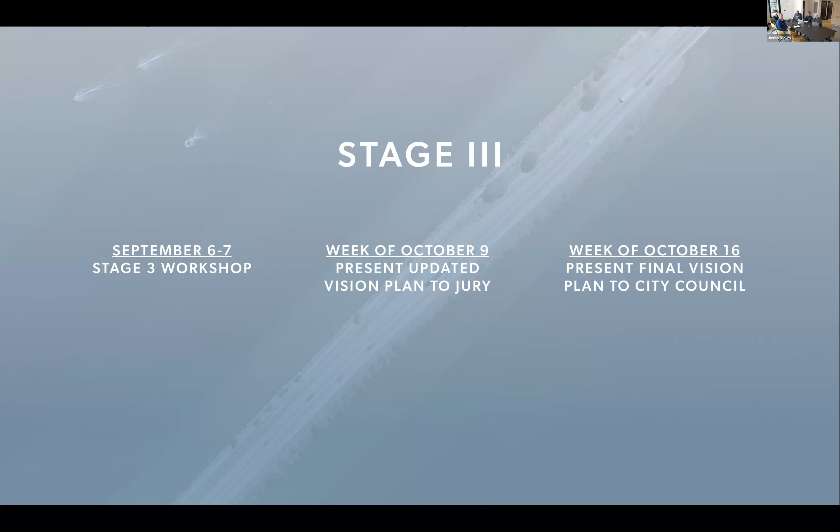Then next week, and the dates are plus or minus a day, but next week we will be in front of council. So what have we been doing over the past month? It's been very enjoyable, productive, and lots of work. Upon being selected, we actually had an internal design review with our entire firm to share ideas and see if there was anything, reactions, what we're missing, things to think about. This is something we do in kind of a studio setting as designers.

One of our first meetings, which was very positive, was with the ZPD development team, the developer and their architects. We walked through overall intent. I think we collectively worked on some broader guidelines moving forward and goals to make sure everything's in keeping with the master plan. They were eager and willing participants. I think there were some positives that came out of that.

And then we had on September 6th, an in-person workshop with city staff. I think Jennifer and Don and team, that was probably 5 hours straight of very productive conversation, going through almost every aspect of what we're going to show you today. A lot of that fed into what we're going to review.

Then we had a working session with Jerry Dicker and his development team and architect in his hotel in Spokane. Another positive meeting that gave us some insight on what he's thinking. And then we had a tribal engagement plan meeting, again another very positive and productive meeting. Sarah will share the results of that shortly here in the plan moving forward, which we're pretty excited about.

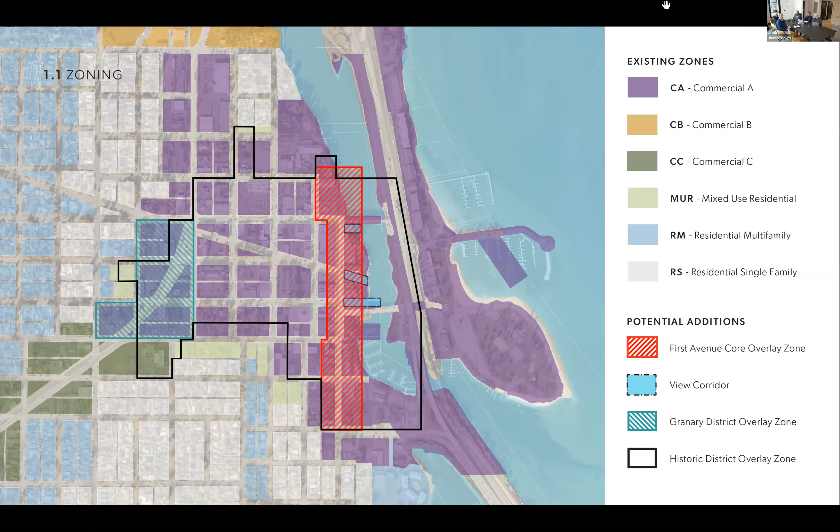Overall, we think that the zoning is pretty solid, but there are some nuanced recommendations we want to make. So before we get into those, Josiah, do you want to add anything? No, you got it all. I'll introduce this next piece, and Josiah will jump in once we get into some of the recommendations.

We did look at the existing zoning, and for the most part, paraphrasing, there's a 35-foot height limit in the zones, and then each allows varying degrees—45 up to 65 feet of additional height—when certain uses are added: residential, structured parking, and others. So in theory, we think this...

Good, go to the next. What we did do—I'm sorry, Mark. Sorry to interrupt. I was unclear what you said there at the end. In theory, what? In theory, we think that works as an idea. We appreciate and think that's the right way to go—having bonus density for specific things like structured parking and housing. I think how much and how high, depending on location, is something we wanted to unpack a little bit.

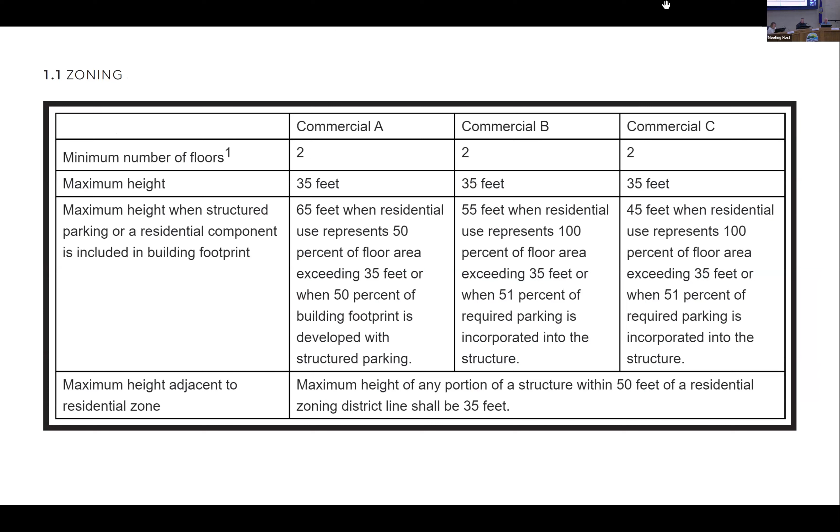So let's go to the next one. The idea is, let's just focus a little bit right now on First Avenue. We have historic buildings on one side, and we have the series of new buildings coming in on First that are, metaphorically, a bridge to history and a transition to Sand Creek. What we're honing in on with this study is trying to enable successful economic development of new buildings without really being an intrusion or a disruption on the context and core of your charming downtown, particularly with the historic buildings across the street. So what you're seeing here is a three-dimensional study and modeling of 65 feet in a full block, and 45 feet in that full block.

Again, this is First Avenue along Sand Creek across some historic buildings. What variable setbacks and view sheds would be so that we could assess that.

So on the top, you see an aerial. In the middle, you see Church Street looking east, and then you see a view of Oak Street, and then you see First Avenue looking south.

In assessing that, we're trying to straddle the line of not limiting development. We want development to happen, but not creating something that will be ill perceived by the community or that we may regret.

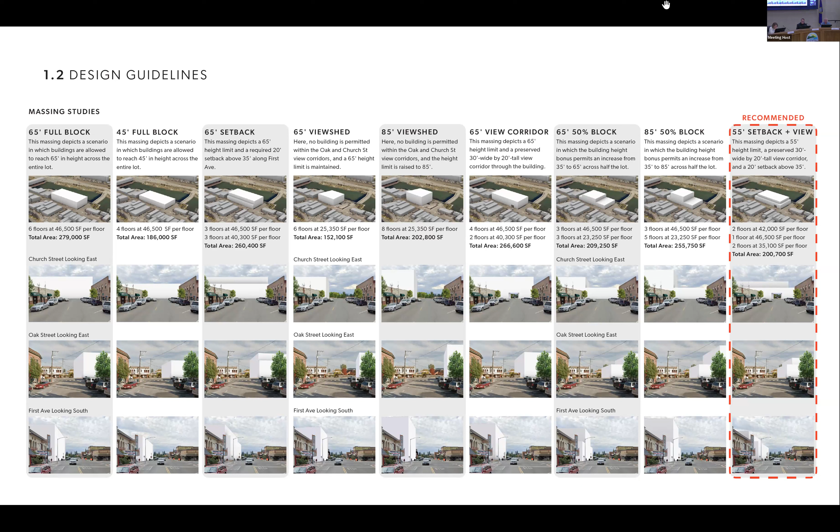It became pretty clear to us on the right that a 55-foot height with setbacks of 20 feet provides a significant envelope for development, but isn't out of step or context with existing buildings.

Economically, from the development standpoint, of course 65 feet is great, but as you saw in some of those studies, which we can go back to during Q&A, it really is hard to see it working. Now this, we feel like, works pretty well.

And so a couple things: you see 35 feet of development with a step back at 35 feet, 20 feet, and then a height of up to 55 feet, with the addition of some sort of portal or view corridor in the alignment of the street.

There's street activating uses, retail, food and beverage can wrap those. There could be a public accessible walkway through that and an overlook out the other side with activating uses and spill out undercover, but the goal is to be contextually sensitive while setting up ease of future development.

And creating view sheds. So this is the sort of end point that we got to with this process, but we think the next process is distilling down guidelines.

Some of this came out of our conversations with the developers. And the other side of this is Sand Creek, of course, allowing, as we presented last time, development to extend out. So the high level guidelines we talked about before were about following a little bit of the rhythm, scale, bulk and mass of the existing buildings with new materials that represent today.

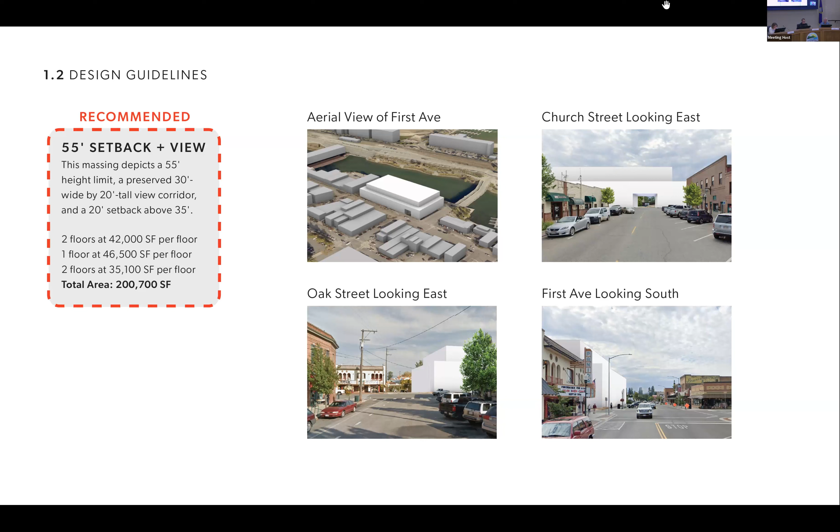And then the guidelines that'll be in the final report, that's a high level one-pager, include using masonry and solid materials at the base, keeping design and the level of fenestration and modulation relatively simple to focus on the quality of the materials. So things along those lines.

I think we want to avoid what we would call gingerbreading of new buildings. We'd rather have quality new buildings that are a future landmark or historic building because they're significant in how they concisely solve the problems of today.

So through the guidelines, what we're not doing is promoting a postmodernist recreation of a historic building. We think that diminishes history over time. We're also not trying to promote an over-gingerbreading of a new building to make it look less bad. What we're promoting are simple, authentic buildings with quality materials that are representative of the uses and challenges of today. There's a lot more to talk about with that and a lot more to develop, but that's the basic premise.

Mark, can you give me or give us an example of gingerbreading? I don't have a concept in mind of the difference there.

Yeah, thank you, Mayor, that's a good question. So I'll describe it without going into any specific project, but you've probably all seen in your travels, or even in Sandpoint, buildings that have 20 different materials on one facade, with a lot of 2 to 4 foot jigs and jogs, busy with a lot going on, not necessarily tracking back to an architectural expression of the use or purpose of the building, but more so as a way to break up a building to make it look less bad.

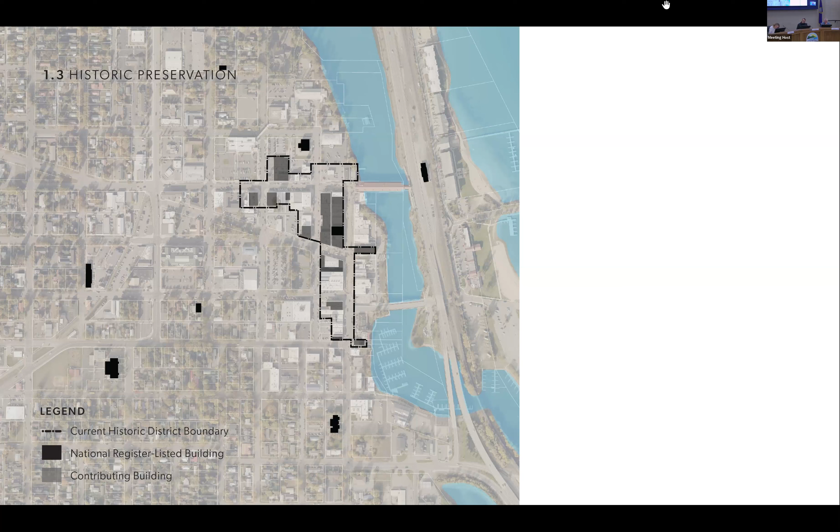So with that, Josiah's going to jump a little bit more in detail. Yeah, so we met with the city and discussed where we're currently at and what we'd like to see to get these buildings under actual protections. So this is what we helped them come up with.

Then the idea there is if you are within the district and you have a historic building, there are more specific guidelines to be developed, and the Arts, Culture, and History Committee reviews it based on those guidelines. That's a follow-up thing that we need to do.

And then if it is a new building within the district, it needs to meet certain criteria of being sensitive to but not replicating historic buildings. So there's probably a layer of design review and an overlap with the Arts, Culture, and History Committee that needs to be an outgrowth of that.

I think the other layer is that we're going to recommend streetscape standards within the district established for your downtown that bring that together in the public realm, which can be implemented both with public projects and with new development frontage improvements. So we'll probably leave it at that and get into the detail in Q&A.

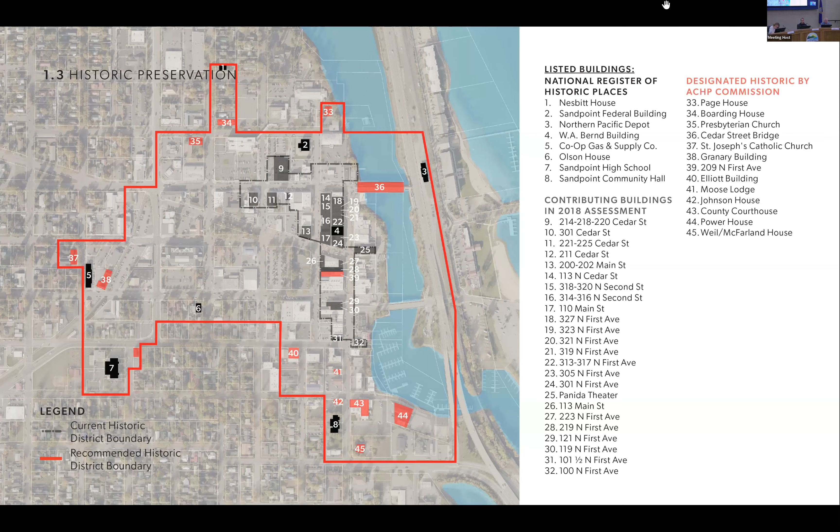Great, so now we're going to move to point 2, and the first one was a big one, so we'll move through these others a little quicker. But balancing ecology and human activity, I think there was a desire to see some more of the ecological improvements providing also some human benefit. So we've focused here on the Sand Creek and City Beach areas.

This is where we left you, and then this is some of the adjustments that we've made. We've incorporated 3 kayak launches along Sand Creek: one at the top at the Cedar Street Terrace, one at Farmin Landing, and then also adding one down by the carousel, as this is an area with accessible parking.

Then we've also been working to develop some ideas for sculptural berms that could help reduce sand migration and prevent wind from getting into City Beach. We're adding lawn and picnic areas incorporated into the meadow and the forest down towards the point, and making sure that we preserve trees along the beachfront to provide shade and windbreak.

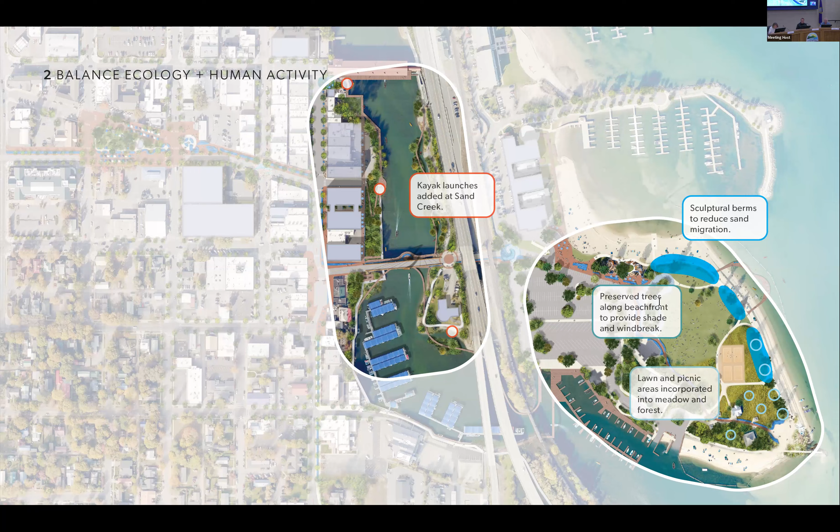The concept of berms came up in the discussion when we met with the city in one of our workshop presentations, and the idea of whether there were ways to mitigate sand migration during the winter months and high winds. So we talked about sculpting some berms near the shoreline, using native plantings on the windward side, and considering whether these berms facing the pavilion or the large green at City Beach could have a sculptural feel, maybe even possibly some seating.

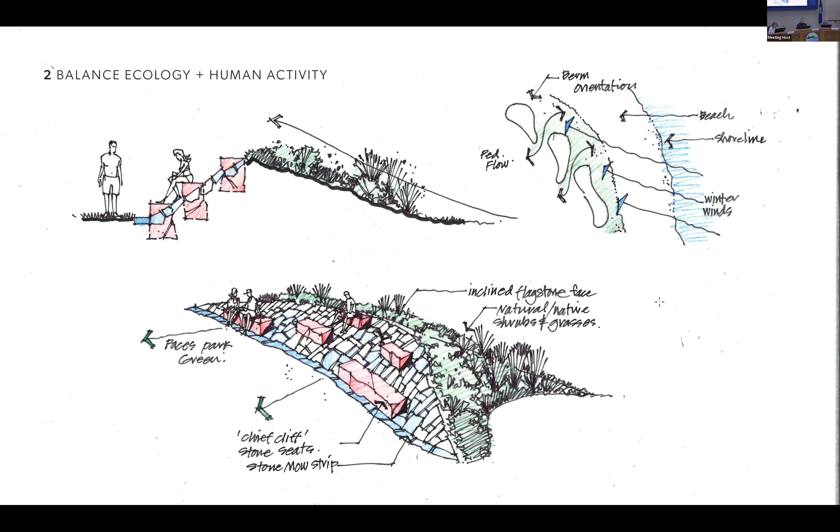And then the arrangement, shown upper right, of how they're oriented and how they can help deflect some of the winds and help promote maintaining the sand versus the migration.

So next, you asked us to look at diversity of housing and considering workforce housing. So we want to get into that briefly.

So a couple things. What we have here is a half-mile, or 10-minute walk radius in your downtown. What we've found and what we're recommending is that a percentage of workforce housing within walking distance of downtown, particularly considering the composition of downtown Sandpoint, is critical to support the service industry from an equity and sustainability standpoint. We rely on a strong workforce for our daily functioning and during tourism season, and taking our workforce and pushing them to spend health, safety, and resources to drive in snow and sleet and dodge animals miles away for housing is just not sustainable and not equitable.

So the first take at this was, what opportunities are there to provide a baseline? The goal would be 200 units within this area. So we looked at a couple sites to get there.

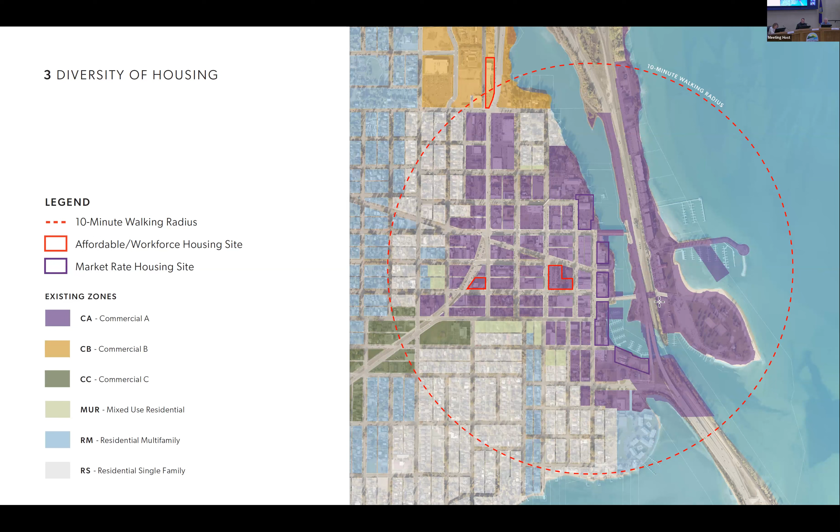You're all aware of many of these things, but we do think, although we have to be careful not to layer too much onto the city parking lot, that there's an opportunity, if it can work economically along with the parking, that should be looked at. There's the site in the Granary District that you're well aware of, which has opportunities underway. And then there's the site just at the northern edge of the boundary, number 3, which is a significantly sized site with strong opportunities. So we're thinking with those 3 sites specifically, there's an opportunity to try to achieve that 200-ish number.

That's based on a fair amount of experience working in similar cities. If we want to get analytical with this, we would recommend a study on workforce housing citywide and for your downtown to vet that number, but I think it was a pretty logical first take.

Some of the other sites, we did talk to developers as you saw through the process, and it's a bit of a push. What we found is market rate housing is private sector led, and of course we want to promote and get that. Deed-restricted and affordable housing is often nonprofit and agency-led. Workforce is really where the partnerships between city, urban renewal specifically, and private development have a lot of opportunity. So that's led to looking at these 3 sites.

And I'm sorry, let me ask for clarification there. You're estimating that the appropriate number within that zone is about 200 workforce housing units? Correct, Mayor. And tell me again what that's based on? That's based on experience working in similar sized cities, kind of going bottom up and top down from what's available site-wise, and what feels good.

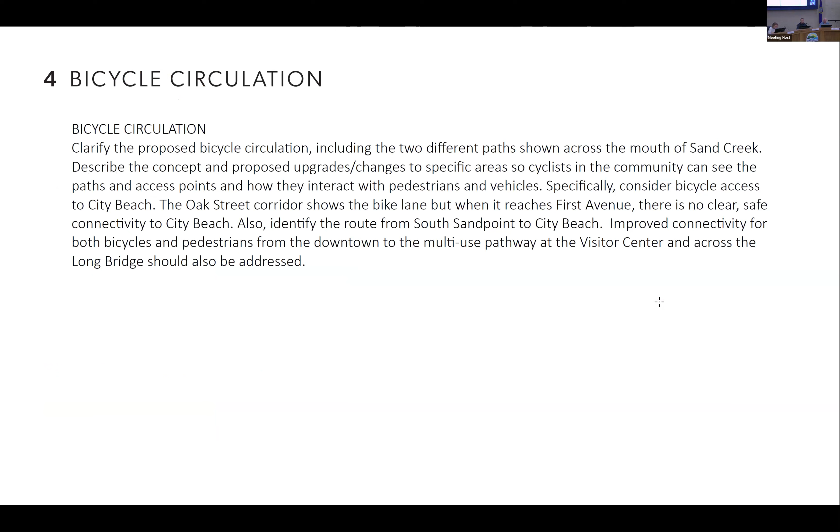So then a next point of clarification is the bicycle circulation, especially identifying how bikes connect into downtown from the Long Bridge, and then what happens along the Oak Street corridor.

So this is what we had when we last presented to you, and we've added some clarification here. Those dark blue lines show shared paths where both pedestrians and bicyclists are sharing the same pathway. The green dashed lines are dedicated for cyclists, and those yellow dotted lines are the boardwalks and trails just for pedestrians.

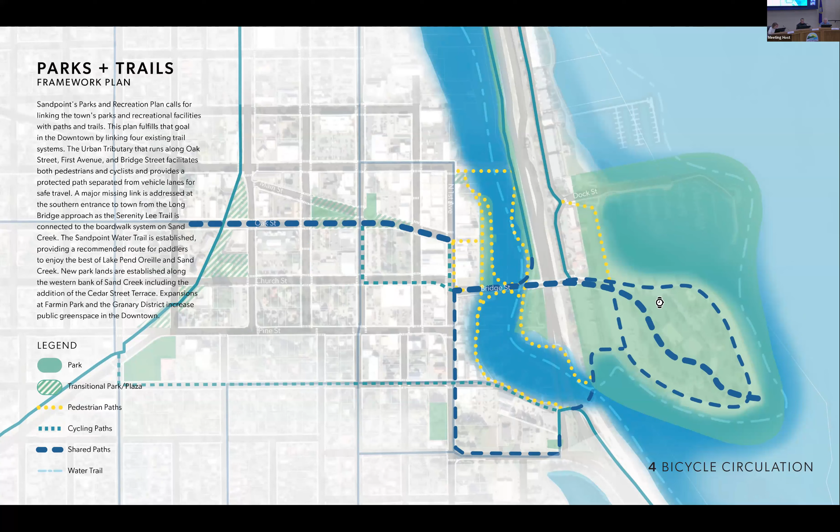So if we look at how that applies to bicycles, here we're just trying to create connectivity across from the trails on the west side to the waterfront trails. Making it really clear for a biker, if they're coming in down off the Long Bridge, how they could stay on a protected lane, this solid line all the way through to Bridge Street.

At this point, because First Ave is traffic calmed, we're proposing that this become a sharrowed lane where bicyclists ride in the lane with vehicular traffic. The other additions you're seeing here are buffered bicycle lanes, which would be their own designated area within the paved right of way.

That provides an alternative from down 3rd Ave and Church Street, and also a neighborhood connection down Lake Street, connecting to the Sandpoint Dover Community Trail.

That's great, a quick question on that. I want to verify you confirmed with staff that there's enough width on 2nd Avenue to accommodate that buffered bicycle lane connecting Oak to Bridge Street or Church Street there on 2nd. Is there the width necessary there? I think we're actually showing that on 3rd Avenue. Oh, thank you. But yes, I think it would work there too, with the new public parking lot redevelopment.

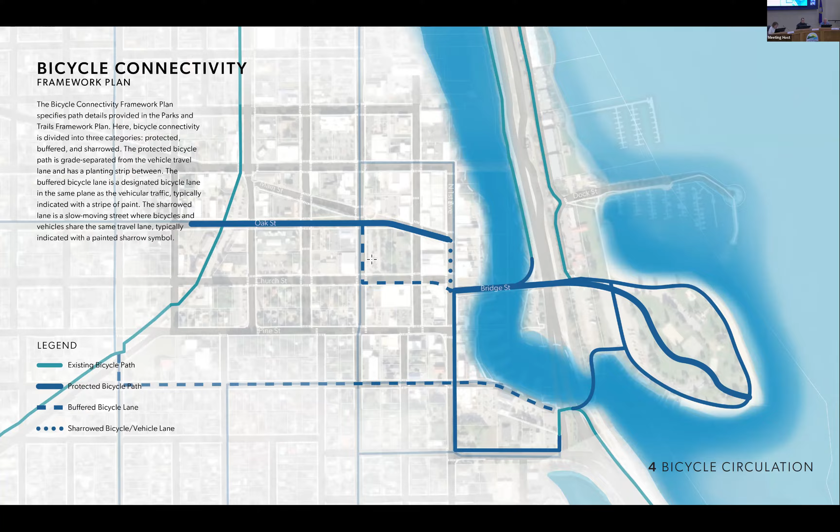Next, we also wanted to provide more information on the urban tributary cross sections, to give you a better idea of what that looks like, and also address some specific questions about the plantings. Mark and Sam can tell you more about that.

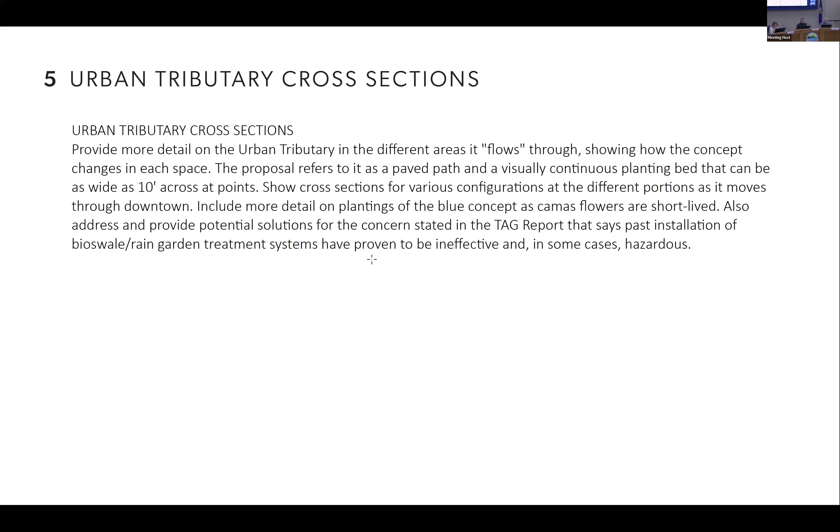Sam's going to go through piece by piece, but the overall idea is to have a cultural and environmental placemaking, education, and interpretation feature that brings the rewilding idea right through the core of your downtown, supporting the many events you have, and teaching folks about the basic ethos and history of Sandpoint. Sam's going to walk you through the system, then we'll get into specifics for each one, and talk about the planting at the end.

We'll start at City Beach. This is the most wild interpretation of the urban tributary. As you move into downtown, at number 2 it becomes a raised planter, providing protection for pedestrians from vehicles, with raised planters for harvesting. As you turn the corner onto First Ave, this is an in-the-ground planting bed area, again for pedestrian separation from vehicles and to keep the path flowing.

At 4, 5, and 6, when you get to the Oak Street event corridor, this is an area with slowed traffic, larger raised planting beds, more areas for harvesting, and more gathering spaces for the events that Mark touched on. Now we'll see those in section.

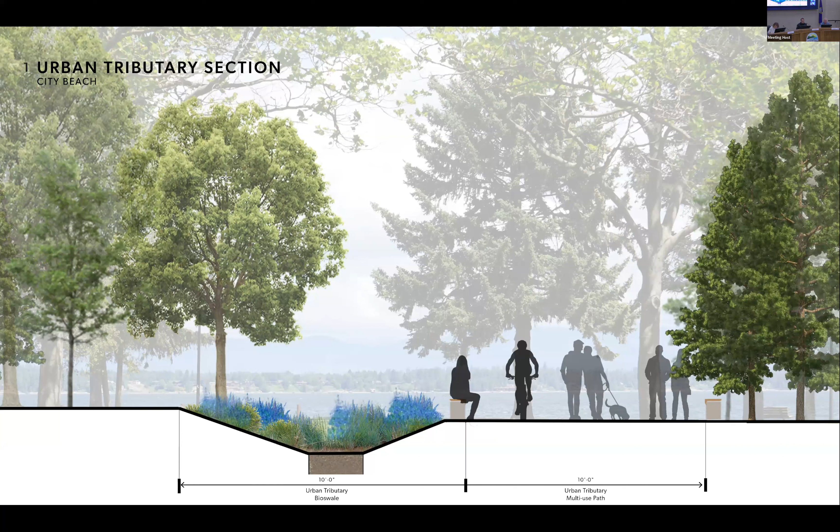What you'll see here is a mix of paving, lighting, planting, and seating with art and cultural and indigenous interpretation wrapped into this piece. It undulates and varies as it moves through the system Sam is describing. At City Beach, you get a bioswale condition where you can manage the quality and quantity of stormwater. It's a more wild approach, shared with an urban tributary multi-use path for bikers and pedestrians as you move through City Beach.

At Bridge Street, you're coming off the bridge into downtown looking at First Ave. Here you have a property line adjustment with the current landowner, and you'll see you've gained 12 feet, giving opportunity for a much larger sidewalk experience with new development.

We're trying to have an active storefront at the ground level, integrating outdoor seating, and here you see the raised, protected urban tributary planter, where during festivals or events, harvesting of the flowers can actually happen. This is camas 30% in intense areas mixed with other elements we'll get into shortly, and there are areas where that may be harvested in a demonstration and interactive sequence. Where that happens, it's raised for a more cultivated bed, for ease and protection.

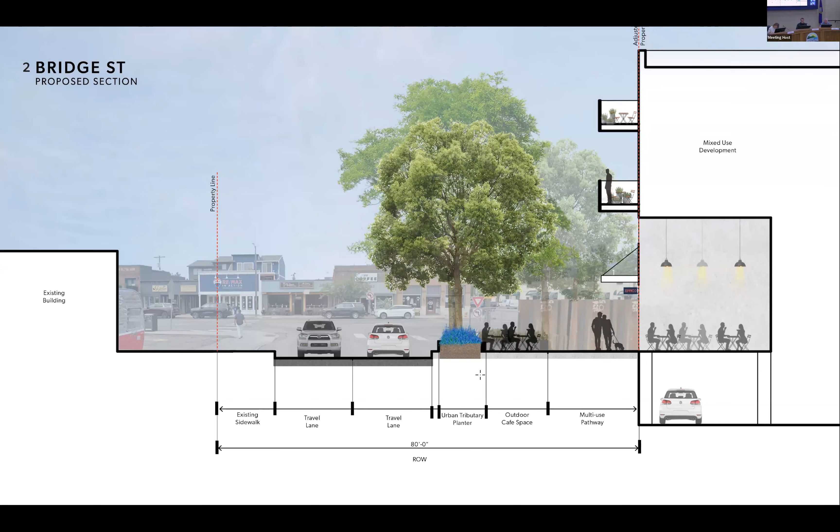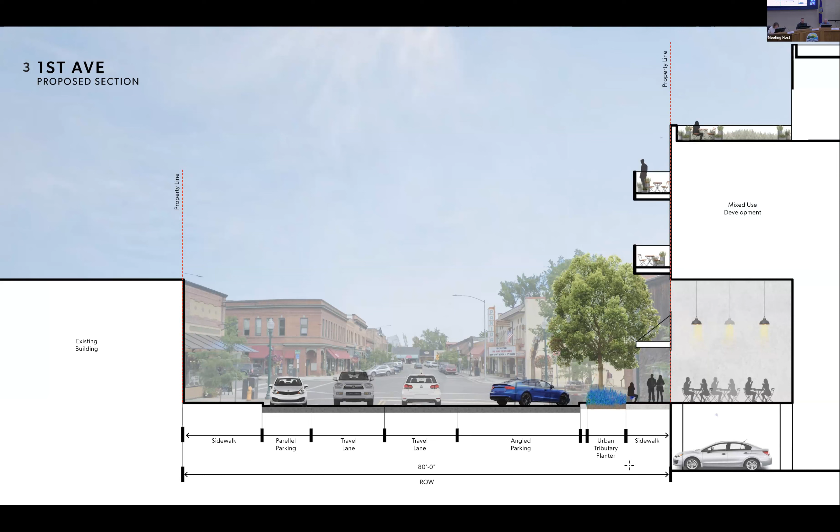As you move to First Ave, this is the current condition, keeping the existing sidewalk curb lines but incorporating the urban tributary planting form with new development, still integrating art, seating, and lighting along the way. Then as you get to the Oak Street event corridor, now a calmer street and a place of events, it flows down the street, using the sidewalks more as plazas.

You see the bike lane here, and then one side of where the angled parking is. This parking count will be accommodated in the new parking garage site that you'll see in a second and have seen on the maps. But here again is the raised planting and the wide multi-use path.

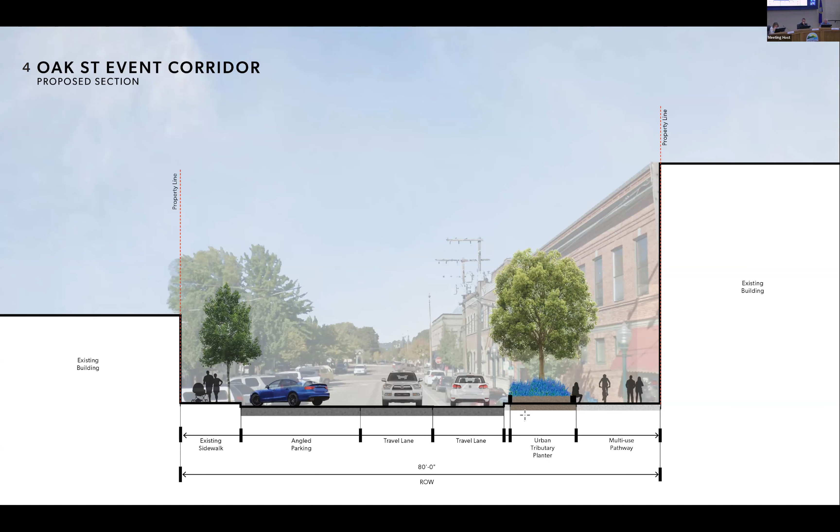And then sharrows here, so if the bikers don't want to be on the multi-use path, traffic will be calm enough that they can use the travel lanes as sharrows.

As you move further up the Oak Street event corridor to the plaza, you see where the new mixed-use development comes in, changing both sides of the curb. You have a lot of excess room at this place where we're proposing a larger plaza space, with raised planters, outdoor seating, event space, the multi-use pathway coming through, planted curb bulbs, and art and lighting all layered in.

And then what you've seen before doesn't end, but goes to this point of Farmin Park. We think Farmin Park, shown here as an in-the-ground planting bed, would be sort of a mix here as a really exciting destination along the urban tributary.

Okay, so let's get briefly into the streetscape hierarchy.

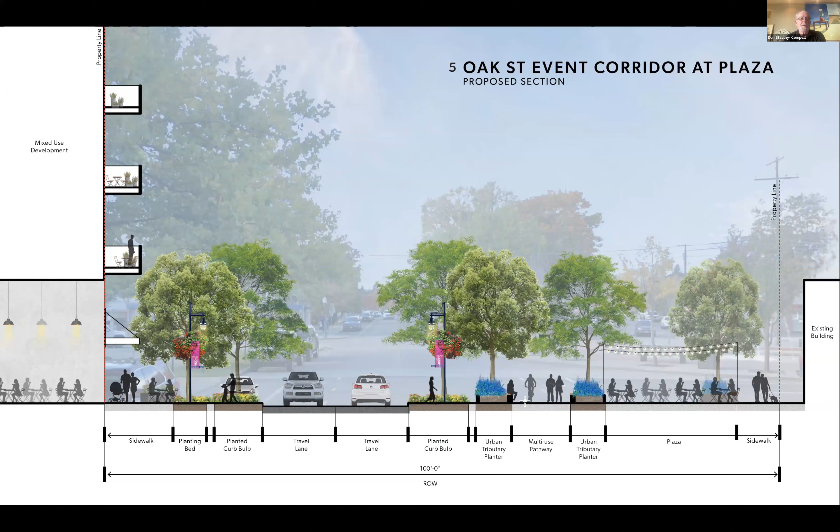If I might point out to the jury, it's very interesting to me, looking at the work done on the urban tributary, that there are clues within these that begin to inform potential development along the edge. It's beginning to set a framework for what those private developments might be, which as design guidelines are more fully developed could be a part of that. It serves many purposes, not just as a tributary, but also to inform the surrounding area.

Yeah, very good point, Don. Thank you, and part of the intent for sure.

All right, streetscape hierarchy - we've referenced this before. One of our recommendations moving forward is to develop streetscape standards for lighting, paving, and planting, a general upgrade for the core downtown area, which could use the landmarks or historic district as the boundary.

Within that, specifically to address your question about lighting: given the condensed nature between City Beach and the Granary District, and the lake, we're thinking all of this needs to be subtle, accented, and as dark sky compliant as possible, which is another reference you rightfully made earlier. For City Beach, the idea is low level accent lighting for wayfinding, but very intentionally kept subtle to protect nature and the night sky.

The urban tributary has its own lighting approach that cuts through that. Then we have seasonal features - the ribbon and the carousel - that would be beacon lights, with their own lighting associated, serving as draws in the winter. But again, for City Beach, it's a very low-level dark sky compliant approach.

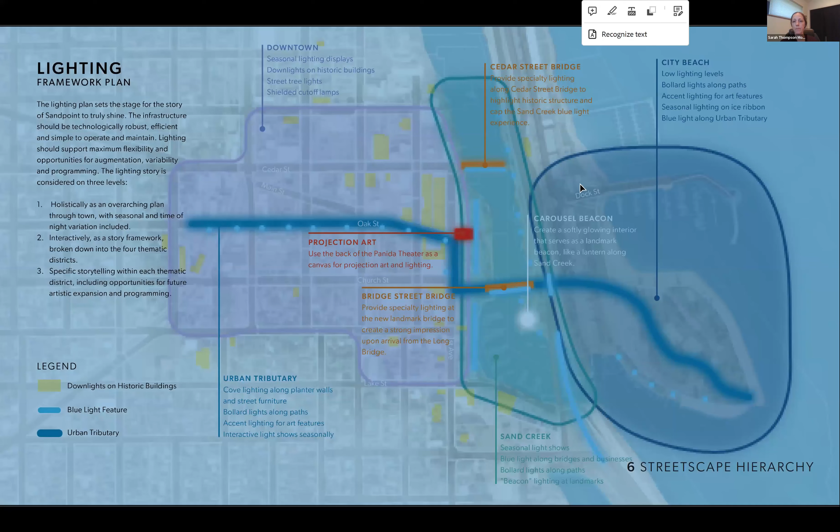We can get back into this in more detail in Q&A, but you get the idea. Let's move on then to seasonal activation.

Here we were looking to provide some more ideas of seasonal activation of the area, especially in the off season in the winter. We had some fun working with the city to develop ideas for other activities and events that could happen in the non-summer months.

You're back, we lost you there for about 30 seconds. Oh, sorry about that, okay.

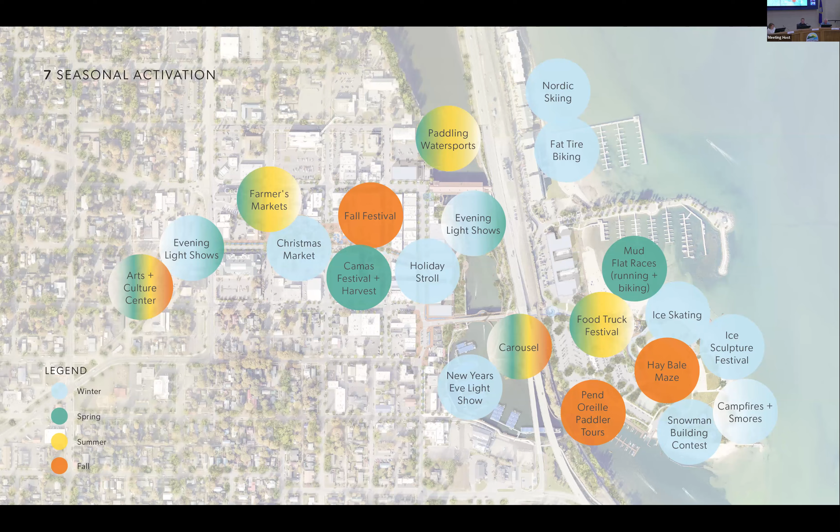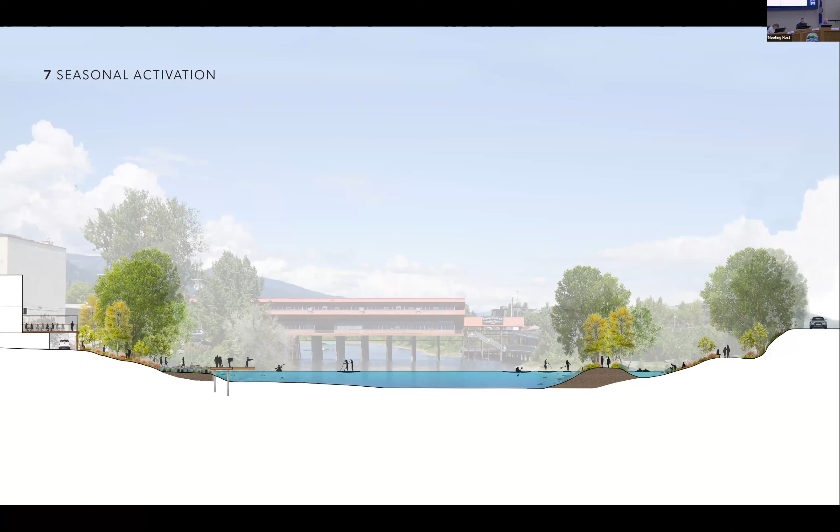We also spent some time looking specifically at Sand Creek. I think you guys have seen this - we know it's a very active place in the summer, so we've also thought about what it could become in the winter.

This is where the lighting concepts can really come into play, with seasonal light shows that happen at certain times in the winter that could really be a draw for Sandpoint. This image starts to talk about some of those opportunities.

We spoke about art projections on the back of the Panida Theater. We'd be looking at methods that create subtlety of light that really interacts with the environment at Sand Creek in the winter, such as the mud flats being a dark canvas that light can project shadow patterns onto, or the light can pick up the textures of the mud flats and bounce off reflections in the existing water.

Potentially working with lighting elements casting downward from within the trees to create shadow patterns on the ground, lighting under the bridges and highlighting those bridges like we spoke about earlier, but really just creating a really interesting environment to explore during the winter through light and nature.

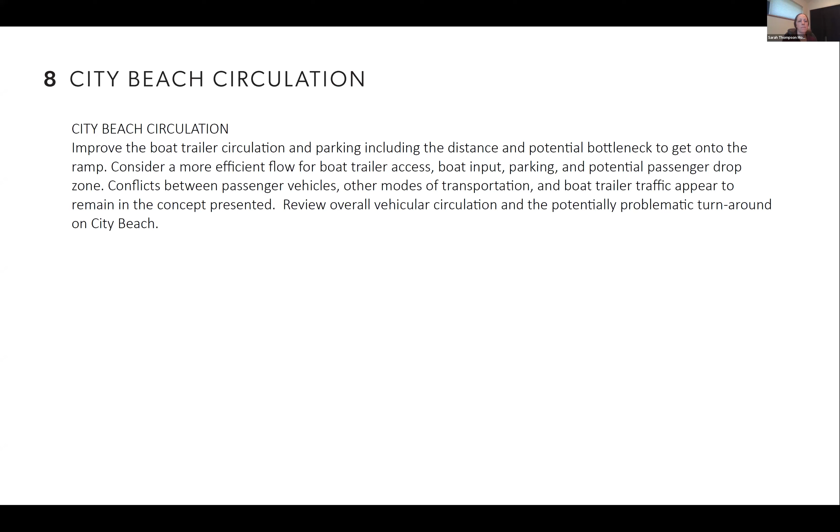Another point that we wanted to clarify is the city beach circulation. We've been working very hard to try and meet some of those concerns.

As we oriented the parking in a north-south orientation for both the beachgoers and the boaters parallel to each other, there was concern about somebody driving in, getting mixed up with our launch activities with no way to get out, and the safety of people crossing through the parking lot oriented that way. Those were some of the big concerns. We were also asked to look at the number of parking stalls, the number of boat slips, and things like that.

So we took a look and went back and revisited it a little bit. What you see now is beach car parking on the north side, the boat trailer parking on the south side, both now oriented east and west. The orientation as people move into the beach area from below the byway and the railroad, with an immediate orientation and traffic calming happening here, with the immediate right being access down to the launch area.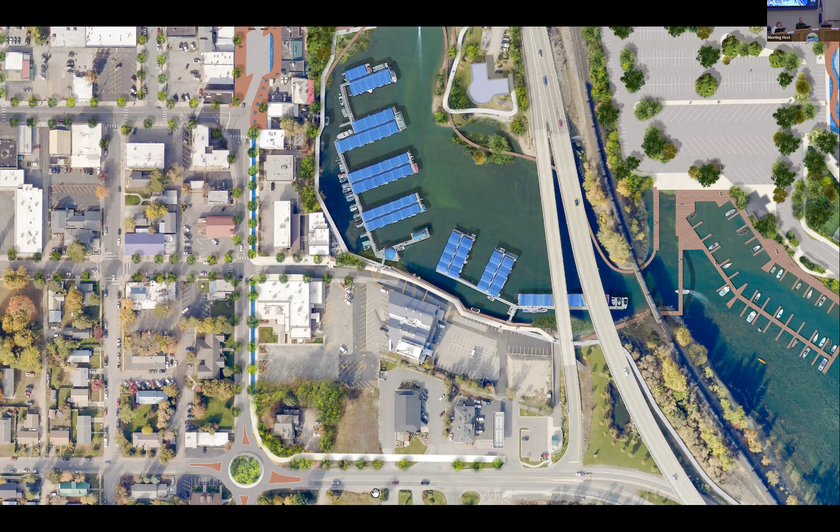Okay, great. And just do the same in reverse if you're going the other direction. So if you're going southbound on 95, you come here, there's a signal. Once you get the green, you turn south here, go around the roundabout like that, and then head out of town. Great, okay, thank you.

So we talked about the bridge. When we visited with you last, we talked about the importance of Sandpoint being recognized as a community with some very unique bridges. This is the plan we presented to you that had some separation between the vehicles and the pedestrians. You heard Mark mention that Phil and him have discussed with KPFF the logistics of the bridge construction, the materiality, et cetera, and I'll let Phil walk you through some of those thoughts.

So the discussion we had with KPFF's bridge engineer focused on the feasibility, timing, and money, which are always important features. We ended up looking at three different scenarios. The first would be a staged construction, which has a longer time frame and costs more. The idea is to use the pedestrian bridge, which would be new, but design it so it can handle traffic initially, probably a single lane going either in or out to the City Beach side. Then the bridge would be done in stage construction: you build half the bridge while the existing bridge is still there, then demo that half of the existing bridge and build the second half. So that's one option - it takes longer and costs more money.

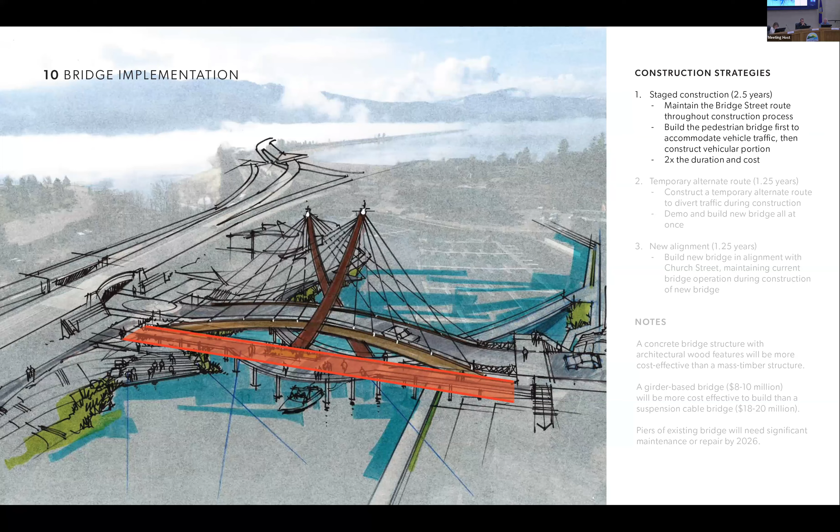So then we looked at the scenario of getting temporary exits off of 95 that would come down the railroad access road, the depot access road, and perhaps develop a one-way configuration in and a one-way configuration out, which does cut the traffic time down. The challenge with it is you're working with ITD to get temporary access off of 95, which can be challenging.

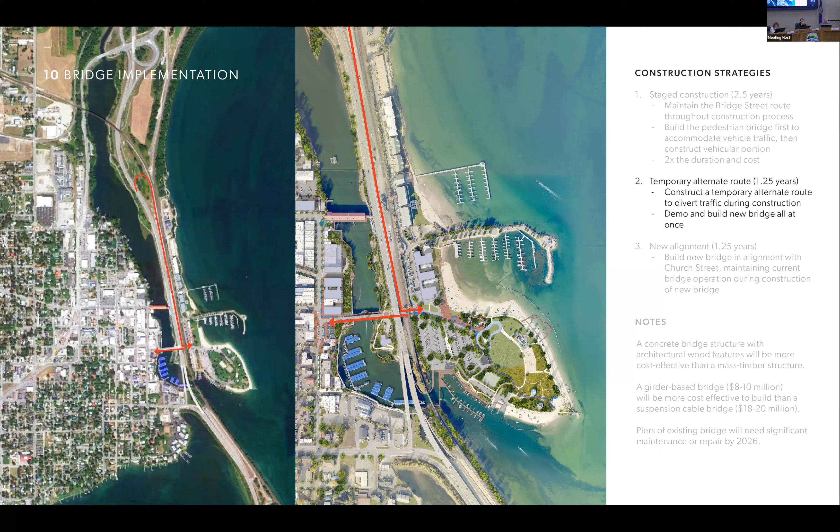And then the third option would be to do a complete new realignment of the bridge, which shows a realignment coming off of Church - which would be really great, but it goes through a piece of private property. Which is presumptuous, and we don't intend to be presumptuous like we're going to go acquire this property, but it's an idea that came up and we thought it was worthwhile presenting because it allows you to completely build the new bridge on a new alignment, and then demo the old bridge.

Or the idea we had was to turn the old bridge into the pedestrian bridge, because it may be unsuitable currently for vehicle traffic for 25 years, but the pedestrian traffic load is obviously much lower, so it could be converted into a pedestrian bridge, the existing one. But still, we don't want to be presumptuous about the private property deal, but we thought it was worthwhile showing this to the jury.

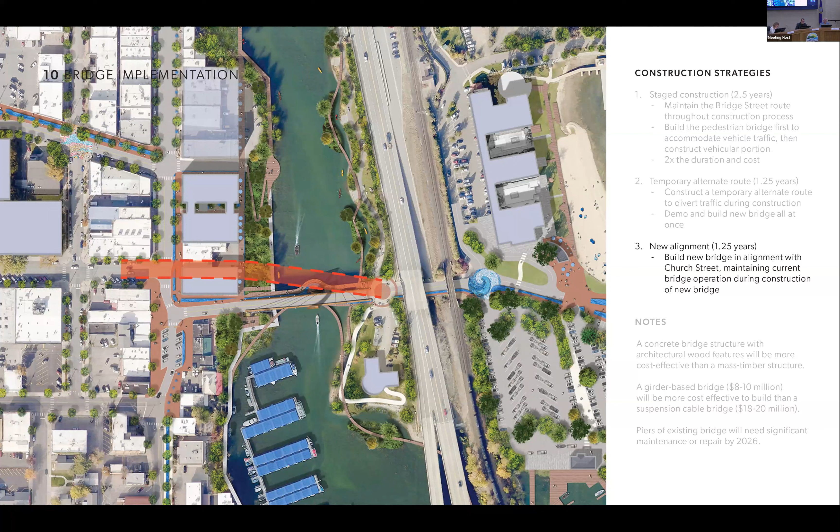So we also wanted to provide some more details on the phased implementation. We went back and did a workshop with the city to clarify what we had shown previously through this 3-phase, 20-year plan. We've adjusted it to now be a 4-phase plan, each phase broken down into 5-year increments, taking us through the 20-year timeline.

Briefly, for the interest of time, working closely with Jennifer in the city and with Phil on the urban renewal funding side, we have some early wins. Some streetscape enhancements going south initially, Farmin's Landing enhancements, some of the Sand Creek Boardwalk extensions, and the city parking lot redevelopment. Those are some of the initial pieces.

Then we have this mid-range phase focused quite a bit on Farmin Park and the event corridor, and some of the key pieces of the urban tributary. In 10 to 15 years, the new bridge, which works with when there needs to be investment in the existing one. Then we get into some of the bigger items in phase 4, further out 15 to 20 years, including the ice ribbon event pavilion and some of the more involved pieces.

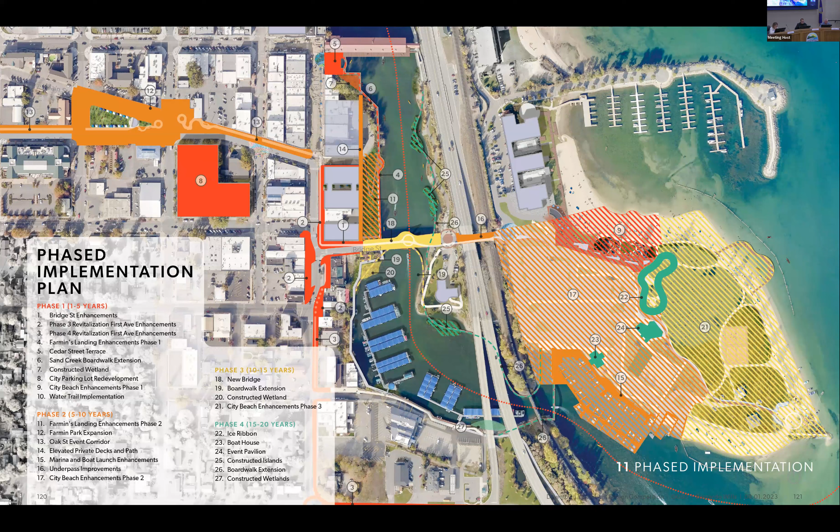We can circle back during Q&A to as much of this as you want, but we'll get into the last few items and wrap things up. Then just addressing some of the things that were missing from our last round.

We've incorporated the missing kayak launches to make sure those are included in the next plan. We've stretched the streetscape improvements down to incorporate the phase 4 downtown revitalization efforts. We've added restrooms to serve the plaza area at City Beach, incorporated the lifeguard shack area into the pavilion building, and also addressed parking and circulation concerns.

And finally, we're already getting started on consulting with the tribes and working on that plan. We had a kickoff meeting that Sarah can tell you more about.

We're really excited to dive into deeper collaboration with the Kalispel tribe as we move forward with this plan. We've already got the ball rolling and started developing what our engagement team would look like. We have representatives from the city and several representatives from the Kalispel tribe, including Francis Cullooyah, the cultural director. We have biologists and outreach coordinators for the tribe, as well as the director of language, all on board with formulating these concepts with us.

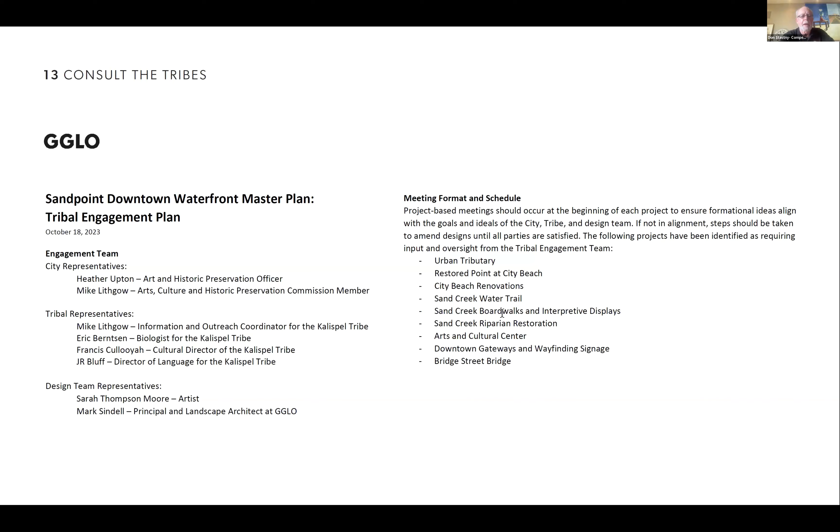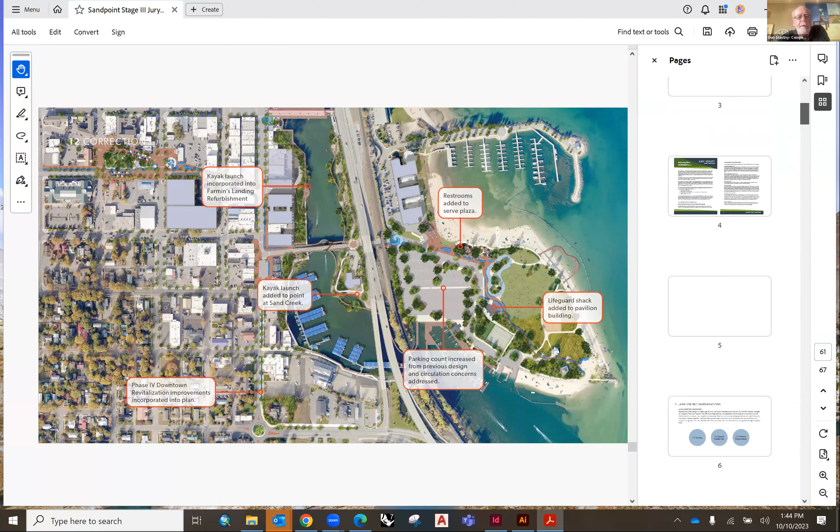Okay, thank you. As I think the jury can see, we've got a team that really takes comments and works them in such a way that they are trying to clarify an overall vision of what this plan could be. As far as working it with the city and city staff, I think for the most part it's workable. It isn't the final answer in a lot of ways, but it's a tremendous kind of plan to start building from, a framework, if you will, for other things.

So I guess the way I'd like to spend the last half hour—I guess we ran a little over—is to go through the jury and have each of you give comments or questions you might have, and let's keep everything as concise and compact as we can.

Han-Mei, you first. I just wanted to say thank you, this helps continue the story, and I really appreciate all the visuals and descriptions. Some of this might feel a little nitty-gritty because we're at that detail stage. Some feedback on the broader historic district guidelines: I like how you're pulling that a little bit wider and capturing more things. I do think there's a sensitivity to the existing buildings that needs to be considered and not lost.

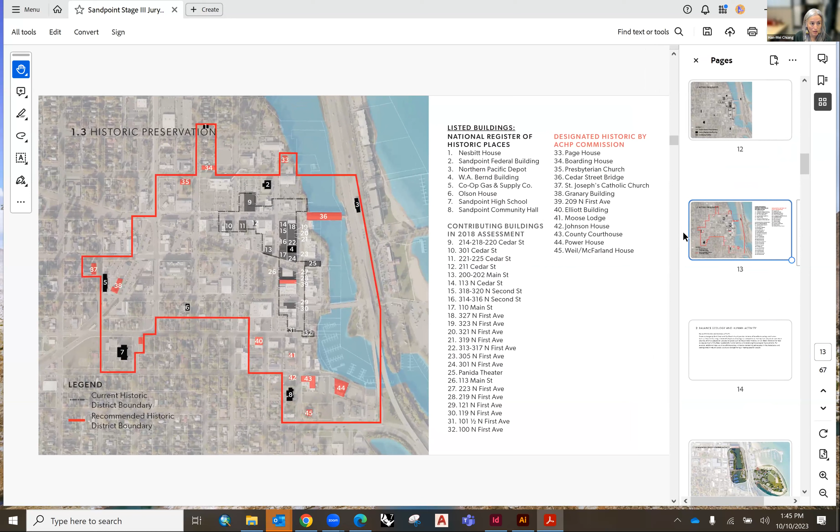An example of that is even myself, when I purchased my house, it wasn't in a historic district, then it became one, and there are now all these layers of requirements. So just make sure it doesn't become inhibitive to actually make changes and update buildings and windows, because that can be cost prohibitive for residents or businesses.

I love that you have taken that walk radius and put the affordable housing piece right in the middle, so they're not on the periphery of the walking radius in the business district you're noting. I do want to challenge you a bit more, though - is there a way to do affordable housing mixed in with market rate? It could be perceived that all the market rate gets the great view on the water while the affordable housing is stuck in the middle. Is there a happy medium, some way to integrate both together?

Thank you for touching upon the dark sky compliance and noting where the lighting guidelines are throughout the city, and touching upon all the different areas that are special and how they're catered and styled to start to identify where the different districts are.

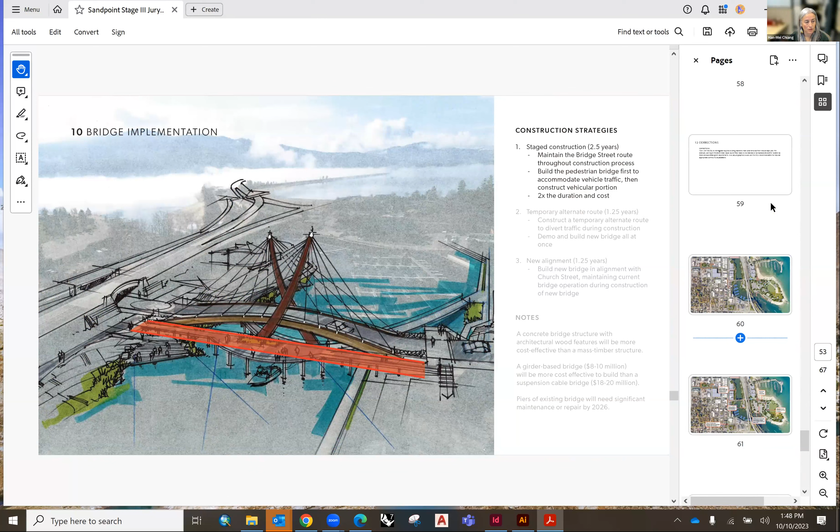Thanks for taking a look at different options on the bridge - I think that gives us a lot to consider and talk through on what makes sense. My last comment is that I appreciate the way you've approached the phasing, broken down into 4 phases with some easy-to-do items integrated in. How do you set the stage and start to have action happen with measurable impacts for each 5-year increment?

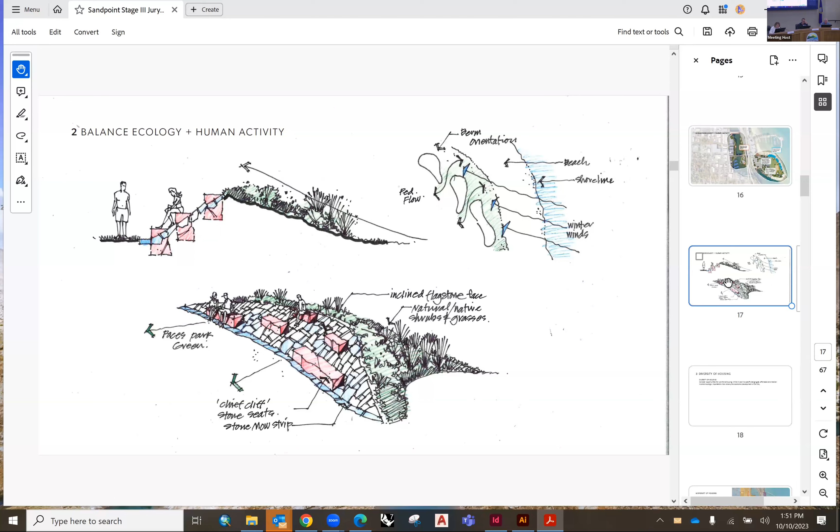I was curious on workforce housing - I know you've just done that, we have that sketch. In terms of the workforce housing in these areas you've highlighted, are you seeing that vision as owned or rented property? Yeah, good question. Our first take is rented at some defined percentage, whether that's 80 to 120, below 100, 80 to 140 - these are all real world examples we've used, but the intent is rental. Then once you get a baseline of rental workforce housing within walking distance of downtown, you'd look at transitional or ownership as well. But this first take is rental, just to get that baseline going.

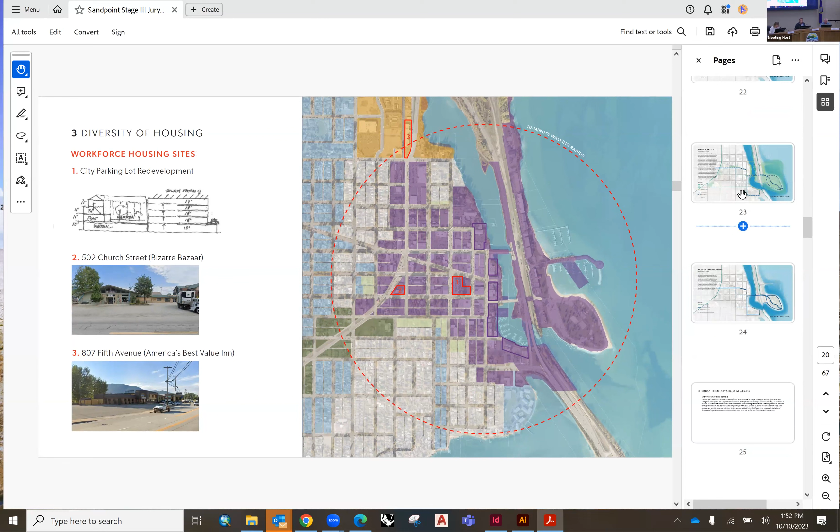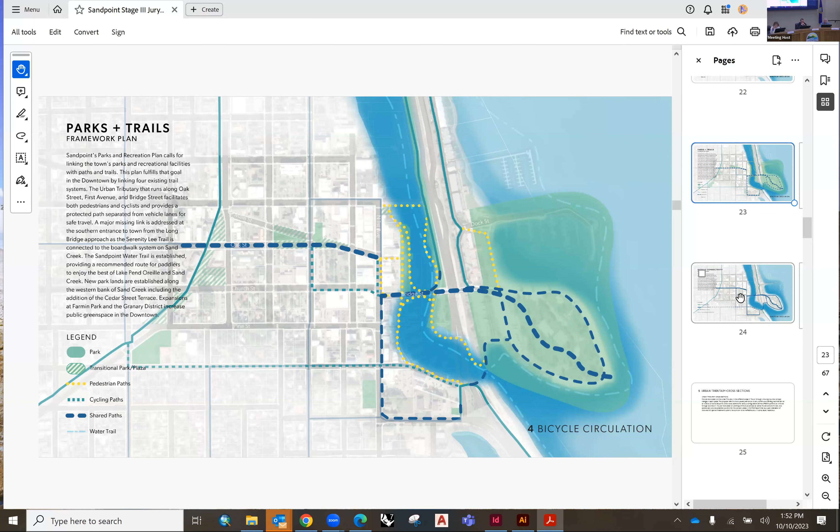The next question I have is going to be a little bit more convoluted, and it includes number 4 and number 5, the bicycle circulation. So I always try to put myself in the mind of, let's say, a 6th grader coming down on their bike into downtown, trying to get to the beach and then trying to get home from the beach. My question is, it seems like the issue may be the transition between the way in which you travel along these paths. So I saw, as a bike travels down, you're potentially on a multi-use path, then you're jumping into the road for a sharrow, then back to a multi-use or sharrow, back to shared pathways.

As you leave Bridge Street, it seemed Bridge Street was a multi-use path where the bike and pedestrian are together. Then you turn right onto First Avenue, which now you've moved from a path into the road. And as you turn left, you have a choice either to stay in the road or be on the path. Then as you go up Oak Street, you're back on a shared path. Can you use the sections to walk me through how a child is going to figure out how to move from the pathway to the road to the pathway, and doing that in reverse? I realize you're attempting to make it easy for them, if they come down Oak, to turn right on First and then turn left and back into Bridge Street. But do you understand the complexity of moving between road and pathway and how that can be difficult?

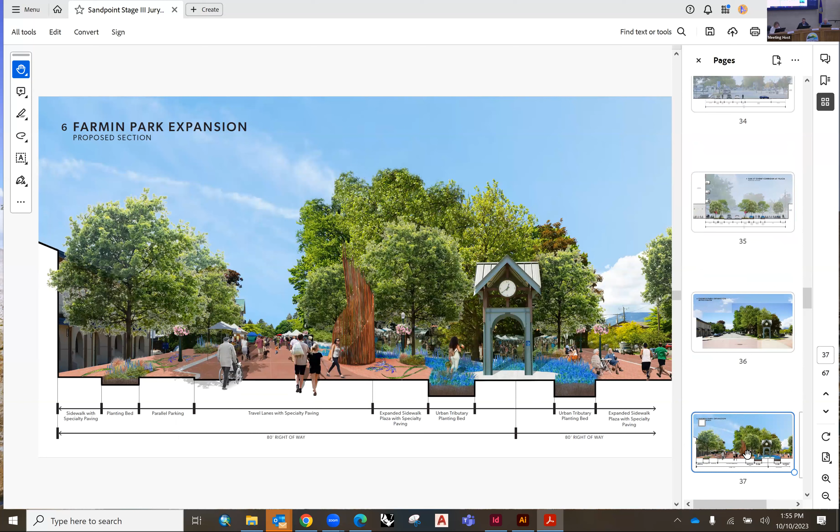Yeah, because I find when I'm on my bike a lot, if I jump from a sidewalk, it's very unpredictable for drivers, and historically we haven't been able to be on the sidewalk. So I'm just trying to make sure that the multi-use pathway is designed across Bridge Street for the bike and the walker to be together.

Not to make it more complex, but on Bridge Street we have striped bike lanes, buffered for folks who want to cruise right through over the actual vehicular bridge. And the idea with the pedestrian boardwalk bridge that peels off and comes across is that's the multi-use path. You'd imagine an adult on a road bike who wants to move pretty quickly is going to just stay on Bridge Street, and the sixth grader is going to peel off onto the boardwalk or the multi-use path that peels off of the roadway.

Okay, great. So just put yourself into a few minds and figure out the easiest way, because this has always been a huge challenge for our kids - they want to get to City Beach, and how do we get them there really safely with all the congestion that happens downtown?

I really liked the thought that you had on lighting of Sand Creek in the wintertime. I could see that really bring people down into that space for that experience.

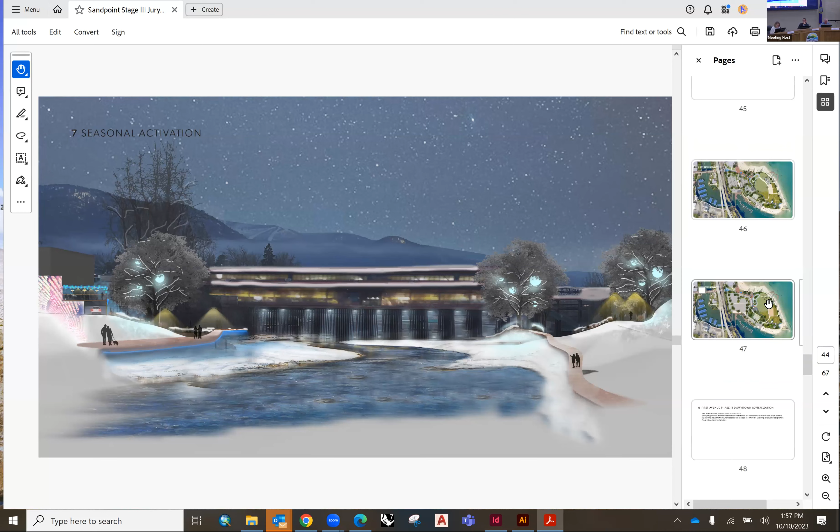So I really like where you guys are going with that. The only other things, one is a crazy idea I'll give you, but the first is I'd love to see more regarding City Beach. I really appreciate where you took the pedestrian paths and parking, it's a complex little zone, but I'd encourage you to think further about how to activate some of that passive landscape.

I think about things like small wooden platforms that sit just a little higher than the beautiful native plants you've put in, to allow different types of seating arrangements as people enjoy City Beach. They might not want to be on the sand, they might want a really quiet spot to lay in the sun and read a book.

I know the community worries a little about taking space away, but I appreciate the nature you've brought into this space to eliminate more lawn for the geese, helping solve that issue, but also really bringing nature back into this space. So just thinking about more passive ways to get people into that landscape and experiencing this beautiful space you've created.

The only other crazy idea I had, pretty crazy, but I've been in a space where teens really enjoyed that same thing you explored with the berms, the rock sitting.

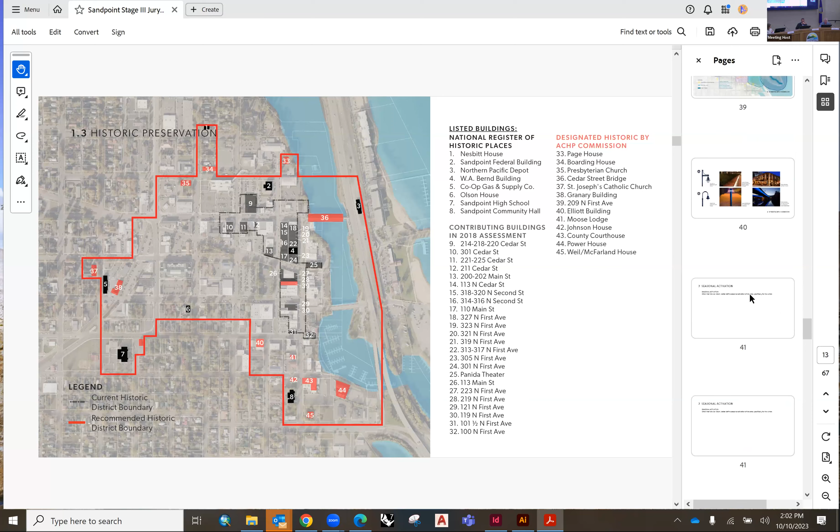I did also, talking about City Beach and looking at the redesign, again you guys have really put a lot of thought into that, and I appreciate what you've done. I think Del Hatch and myself both grew up here cruising City Beach when you could actually drive all around it, there was a road all the way around, kind of a loop. And actually we used to ride on Bridge Street too.

And so the idea—somebody, I don't know whether it was your presentation or somebody talked about cruisers—it's a historic fact in small towns that a lot of times you don't have anything to do in the evening, so you drive your car around and look at things. But it looks like you guys have really started to grab onto that.

Seeing the old beach hut, I think you'll have some community pushback on that, taking a structure that was built under the Works Progress Administration. But sometimes timing is everything, and to properly address that I think would be great.

Good design feature too, looking at these islands as a way to try to slow down the migration of sand off the city beach, which has always been something the bulldozers have had to get down there and work with. Maybe this would allow for less intrusive mitigation efforts in the future.

Good idea there—the circulation of putting First Avenue down to Superior, and the idea of a roundabout there, is again a great idea. I know roundabouts have both their proponents and those who don't like them, but overall I think done correctly they can really work and help with the flow of traffic. So overall, I thought you did a very excellent job of addressing our concerns.

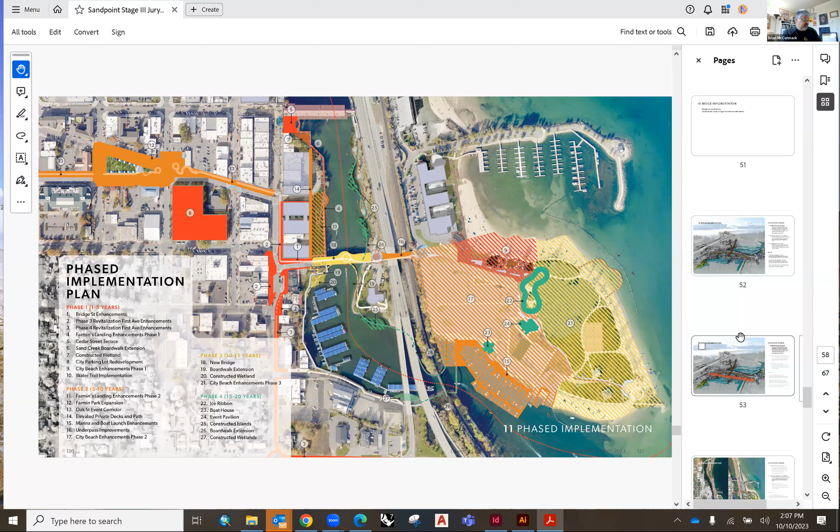What was the cultivation bed? I was kind of curious about that—I guess we could read more about it when we get the final report, but it's kind of an interesting concept.

I'd like to hear more about that. I worked in Flagstaff, Arizona, which gets multiple feet of snow, and watched how the city landscaping just gets destroyed by snow removal. I know Lewiston got hit with a pretty big snowstorm a few years ago, we got like 3 feet, and I'm sure you guys must get those occasionally too. So providing areas where snow can be removed while also protecting all the landscaping you've put in, snow removal areas, I think, is going to be really important. But overall, I was really impressed and happy with the design. I'm looking forward to going back and walking and biking around Sandpoint someday soon. So thank you very much.

Thanks, Brian. Mayor Shelby. Thank you, Don.

I concur with virtually all the comments I heard from my fellow jurors. This is an excellent plan. I thought it was very well presented, visually beautiful. And I also appreciate how you've addressed all of the concerns in detail that we raised after stage 2. But I will echo some particular points here just to get it on the record.

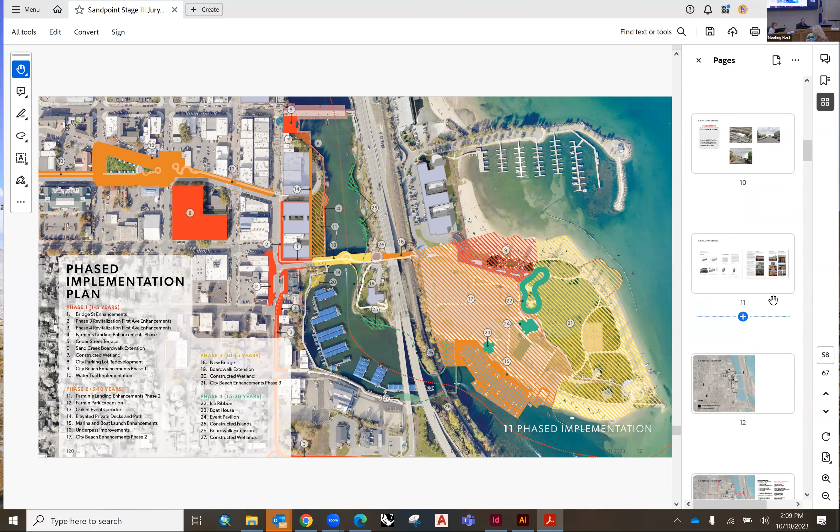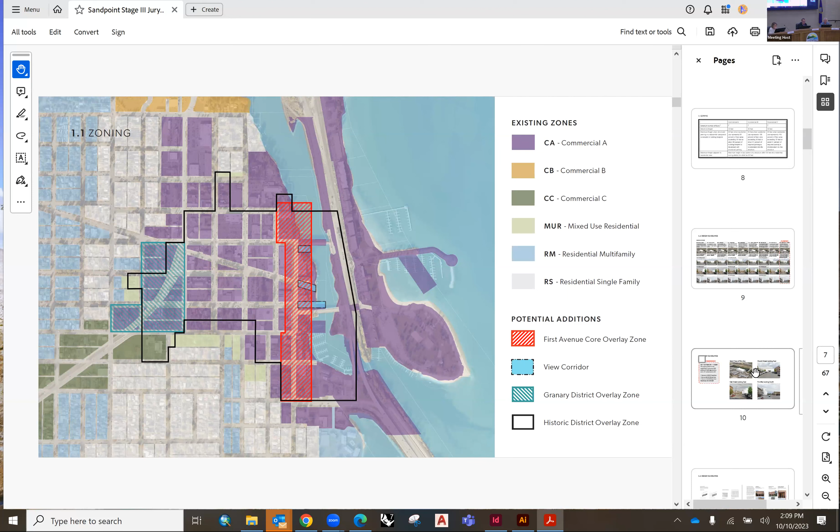Maybe there's a question in here. On the zoning, I appreciate that you recognized our incentive structure for increased heights downtown. And I guess I did have a question around the 20-foot setback. In our existing commercial A zone, the code states it can be a 12-foot setback above 35 feet, or 10% of the lot width. What I like about that is it keeps the setback proportional to the scale of the building. I was wondering what you think about that, and why you went with the standard 20-foot, because on a small lot, say on First Avenue, where you have really limited space, you could achieve the same kind of scaling perhaps with 10% versus a 20-foot. So if you could comment on that, I'd appreciate it.

Mayor, good point. Our thinking there was, in talking to some of the development teams, from a program standpoint, they were bulking up the mass on First Avenue to step back for amenities facing the water. Natural thing to do. In reality, the height, bulk, and scale issue is not on the Sand Creek side, but on the First Avenue side.

So there were a couple reasons for increasing the width of that setback. One, visually, as you see in this modeling, it helped quite a bit and really created that feeling of contextual height, bulk, and scale. Two, it sort of incentivizes bulking up the Sand Creek side a little bit more and balancing some of the setbacks on the First Avenue side.

And the third thing, since we do a fair amount of this, is that in order to not have those be basically token walkways or balconies or patios or terraces that are too shallow to be very usable, it allows those step backs to become more animated amenity space up above to support that. So having said all that, what you have and the way you described it works pretty well. These are just recommendations, that's our thinking. Happy to continue to see if it's worthwhile, or if you stick with what you have. But that was the reasoning.

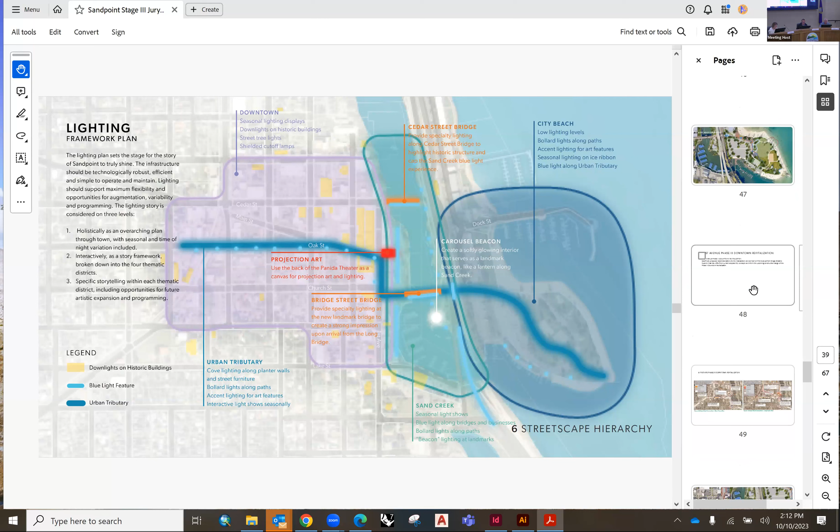I also really appreciated the improvements you made to the beach circulation plan. Reorienting those parking areas, I think, was brilliant and addressed the bulk of the concerns we saw there previously.

I also appreciate the roundabout that was accommodated there down at the boat launch, for those that get stuck down there, it makes it back to the city beach. That really gives those that end up in the wrong place a way out, which is critical.

Especially in a high traffic time down there with big vehicles and trailers and whatnot. Like Steve, I also felt that the removal of Martha's Snack Shack is going to be a challenge for the community, to give up something like that. I know we can be pretty attached to what already exists on the ground, and certainly the city's made investments into that as it stands today.

But I also don't think this plan in any way hinges on that. We would just trade that for some more green space, and it's the community's decision whether or not that's important. But I do appreciate the extended green area there, the lawn, if you will.

This was one of my comments after stage 2: I appreciate the concept of the rewilding down at the southeast corner of City Beach, but I feel like it's too much. We already have a very busy, very packed park for 3 months a year, and taking away that much green space is going to feel like a loss.

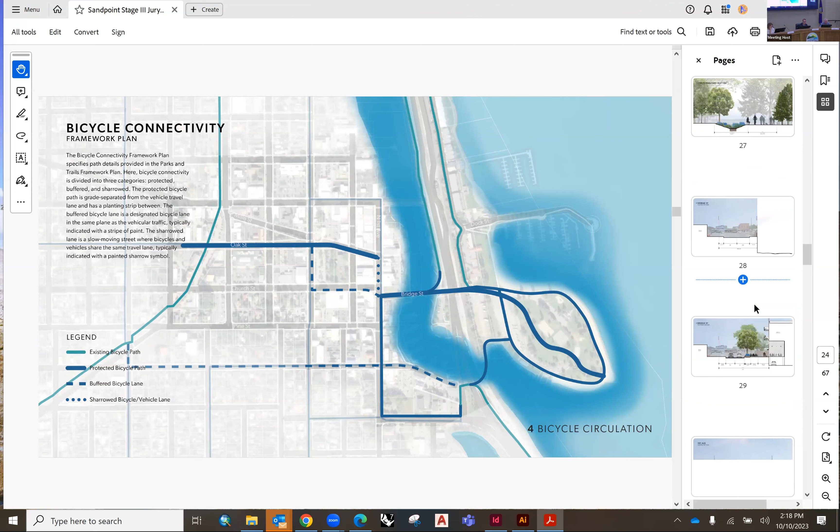It occurs to me that there was such a fight to preserve and even increase parking downtown that with our downtown streets plan, we've created diagonal parking throughout the downtown core. But certainly we could consider 1 lane of parallel parking for that section of First Avenue, and potentially even one block of no parking on one side of the street, and have quite an impressive multimodal facility there, if not even extended to a multi-use plaza or patio area for those businesses or cafes along the street there.

So I think that's worth considering here, especially as we're discussing and hopefully entertaining the possibility of a parking garage. We're only talking about maybe 10 spots or so along the street there, and we're going to be building something like 450. So I think that would really go a long way to putting people's concerns at rest around multimodal connectivity along that critical corridor from Oak Street to Bridge Street.

And then I also... Shelby, yeah. I'm glad you brought that up.

I didn't want to bring up the parking down there, but when I look at this and then look at downtown Coeur d'Alene, they've kept parallel parking. I hate to bring up Coeur d'Alene when we're talking about Sandpoint, but you brought it up, so you're the mayor. I think that's worthwhile looking at, it's always been problematic going up that street as a way to get out of the beach on a bike and up through town. Those three months of summer, it would be really nice. Thanks for saying that.

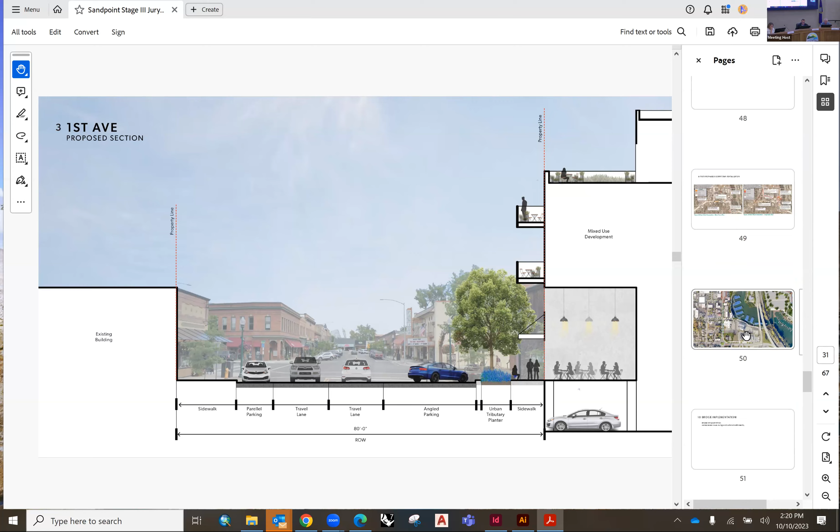Those are the specific things I wanted to highlight. But again, I wanted to commend the team. We really appreciate the tremendous effort and skill and talent you put behind this. This is a great gift to our community. You've gone above and beyond what was called for here, and we're greatly appreciative of your effort.

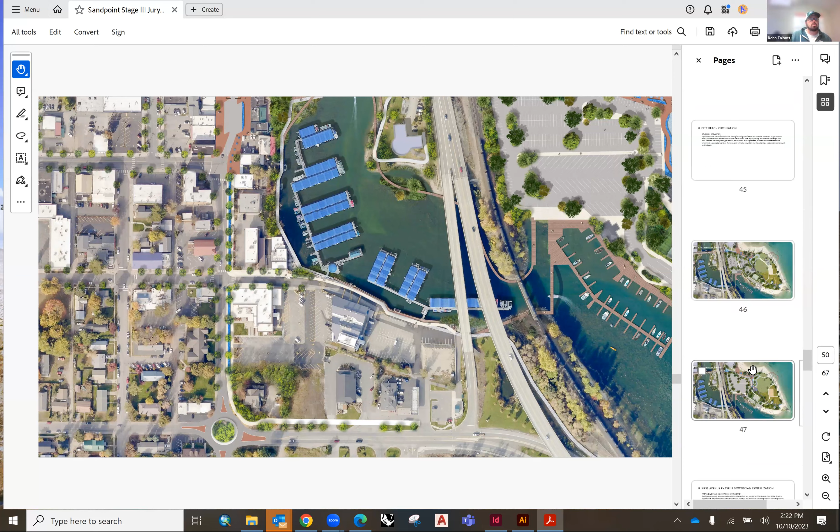I do have one question there as someone that would possibly be putting on an event at that pavilion. What is the accessibility to the back of the stage, and from a production standpoint, being able to bring in equipment and put on an event, because that's a fairly large field and it would take a good amount of equipment to make that happen. It's not something you want to lug a long ways, and you definitely want to be able to roll it wherever you're getting to.

Ross, right at this point here, we wanted to keep the parking for the cars and the beachgoers separate from all the parking for the trailers and such. So this is not a permanent access that would move through here. This would be a controlled access, bollarded off, so day to day you can't move through there. But during some sort of presentation, you have a little bit of parking on the back side here to service something happening at this venue. Vehicles could pull in here, and this area, this paved area behind it, is set up extra wide for vehicles that might unload different equipment and things like that. So theoretically, we're looking at a zone right through here that would be accessible for venue use during events.

Okay, alright, let's see. Something else, the kind of same idea is at Farmin Park. Can we go to that and look at the accessibility to the pavilion there? Yes, just a second.

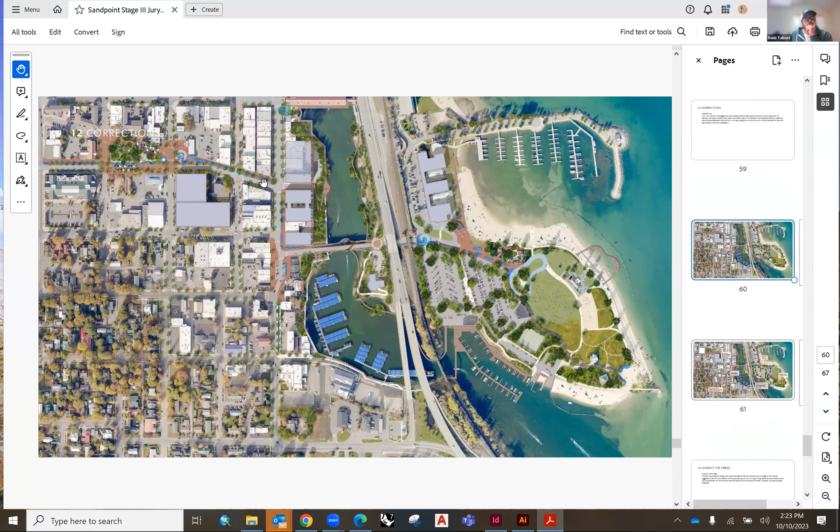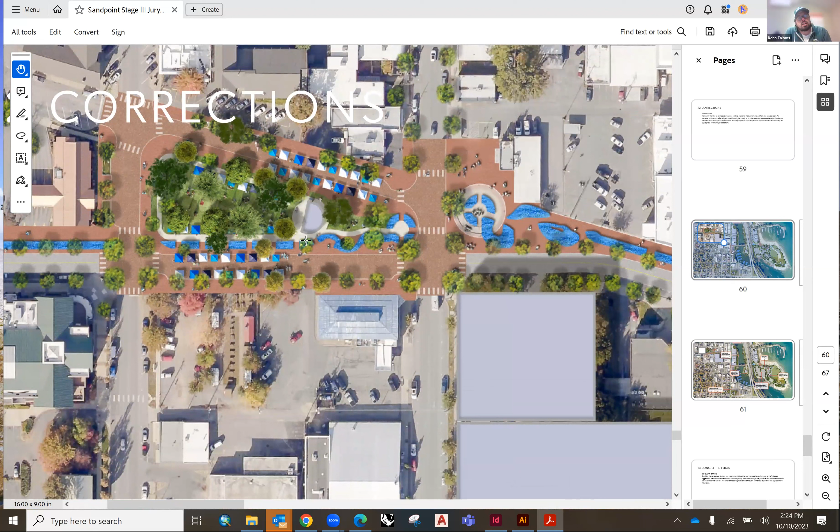So in production, even in that space, when we put on an event there, we've got a three-quarter ton truck pulling a 12-foot trailer that pulls up and parks in that area, as well as the band oftentimes has a 15-passenger van with a trailer it's pulling. So that looks like it might be a challenge.

Possibly, what's the access coming in from Main Street there, just north of the pavilion, where those tents are? Would that be... Yeah, so that would still be, you could pull cars in through there. We're just showing tents there during a market situation, but you could certainly get a vehicle in there. Okay, cool.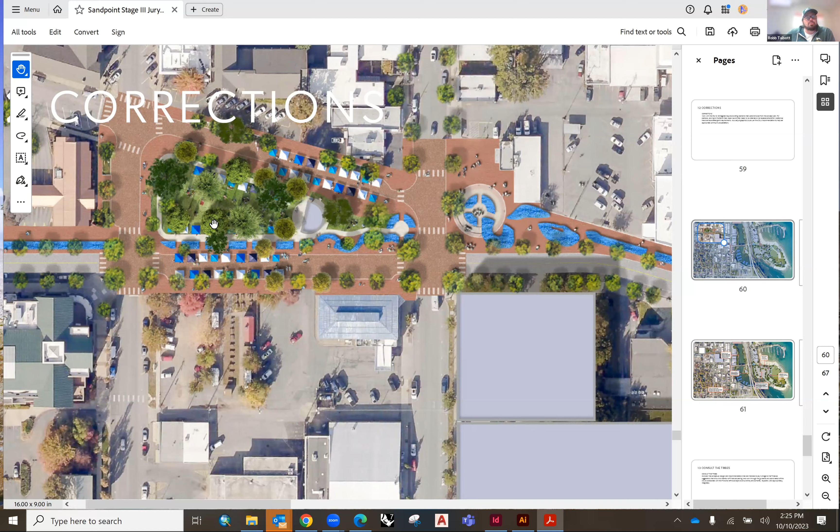The roundabout at First and Superior, I really like that idea. I hate that intersection currently, and I like making it a welcoming spot into the community. That was whoever brought that up, I like that idea too. I think that was Herb.

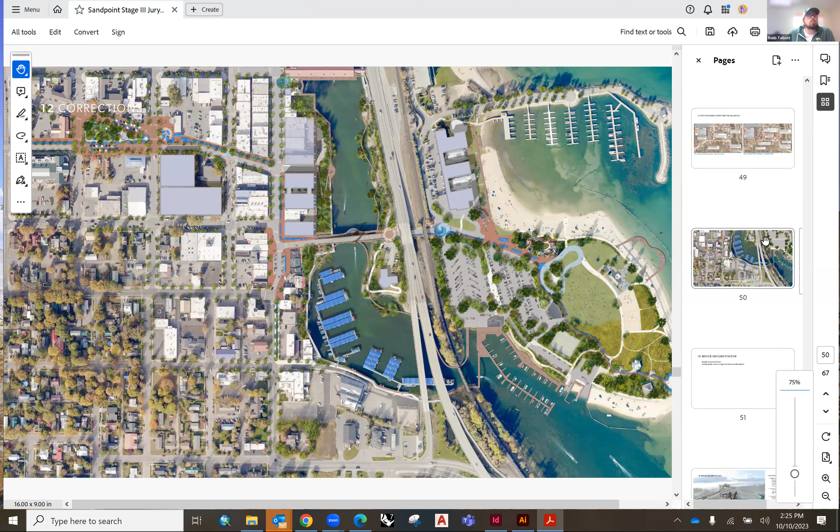The angled bridge on Bridge Street, I think that seems like a lofty goal, but with the hole in the ground that's there now, is it a possibility? Because that sure seems like it would take care of a lot of the concerns. I've been in a lot of meetings and committees upset about how to deal with that intersection between Bridge Street and getting back over to Oak off of First. The idea of shutting it down in that area between Bridge and Oak has come up a lot, and the business owners on First Street don't like that idea, rightfully so.

I haven't seen this idea before, so maybe it has been brought up and squashed, or maybe it's been brought up and just needs to be talked about more. But this looks like a really good idea. As someone that lives in Sandpoint, I like this idea a lot. If it's a possibility, I think we should try to see if we can make that happen. Thank you for that idea.

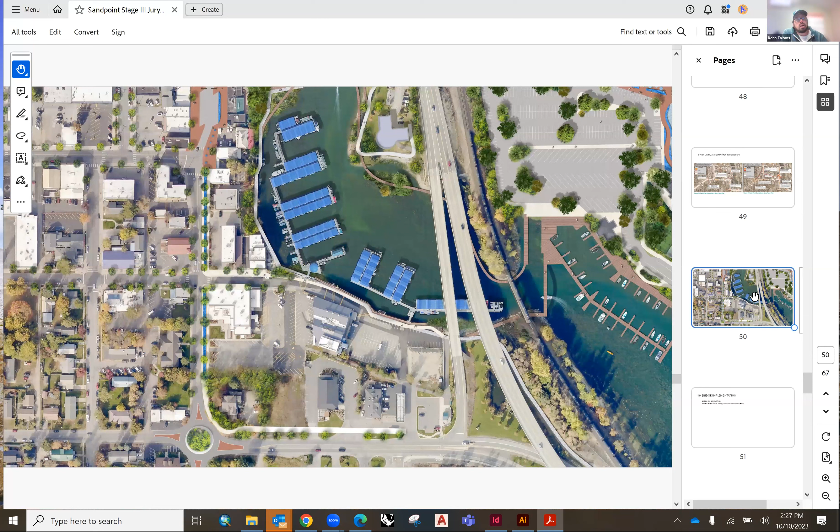Going down the list here, the last thing I want to check in about was the traffic patterns. We had a couple views on that traffic pattern between Cedar and Pine on 5th Street, and I want to get your opinions on how to deal with that, or how that's going to look. There's a stoplight on either side currently at Cedar and 5th, and then there's the option of changing Pine to 2-way and putting a stoplight on it versus taking up the current bike path with traffic.

My question is, how do you anticipate that affecting bike traffic coming into town if we take up that bike path as traffic? How do we anticipate that making a difference and making it harder to walk, putting up a barrier? To me, the two different lanes seem like a barrier to pedestrian traffic, as opposed to having one, where we only have to cross one road.

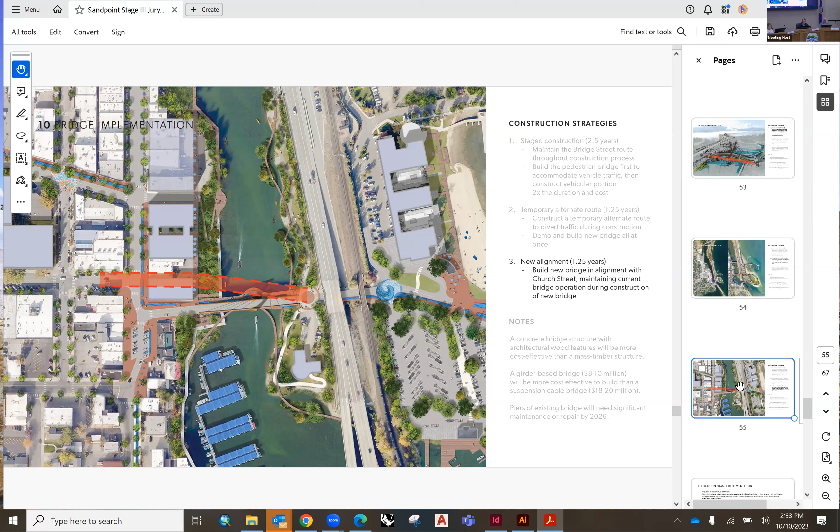And just for the record, this was something we discussed internally a couple of years ago, but it was determined that the cost would be a lot for the city to bear with an already expensive project. But here we are, looking at this whole new paradigm we're faced with right now, and now we're creating a funding mechanism to support this downtown master plan. So I think relooking at something like this is absolutely feasible.

And when I think about one opportunity the city has here, if there were to be something like a land swap where we're taking a significant parcel of land there where the new bridge would be located, it could be traded for the right of way above the existing Bridge Street, and there could be air rights for a development that happens above that space. It could actually be something close to an even swap, conceivably. So I think that would be a great way for the city to potentially offset that cost of acquiring the new parcel of land there. It's definitely worth taking another look at. So thank you for bringing attention to that. A couple of you did mention the bridge realignment there.

Thank you, Shelby. I need to move on. Karen.

Yes, well, I too want to thank the team, very solid presentation, and want to thank you for being responsive to our input and requests. Much appreciated. Some of this stuff has already been touched on, so I think I can speed through my comments. Like everybody else, a historic district expansion I was clamoring for before you got to it, but I too, like everyone else, am concerned about any future restrictions that would come along with it. And I know that's going to be taken care of.

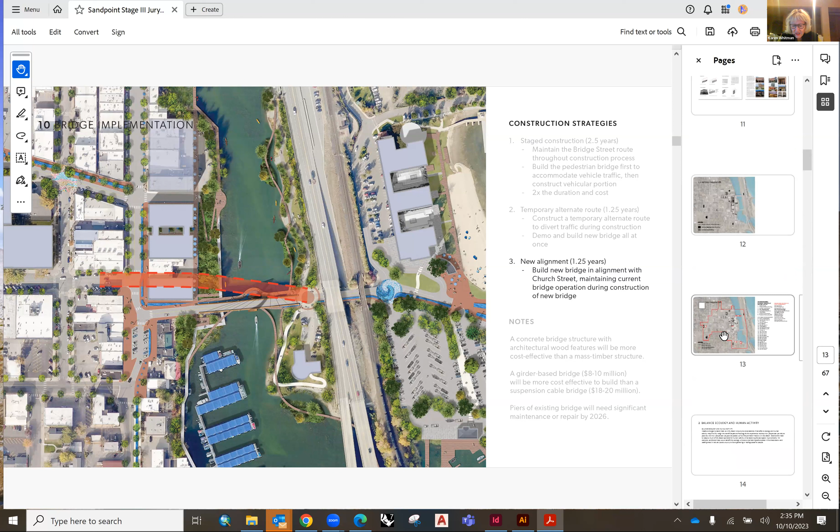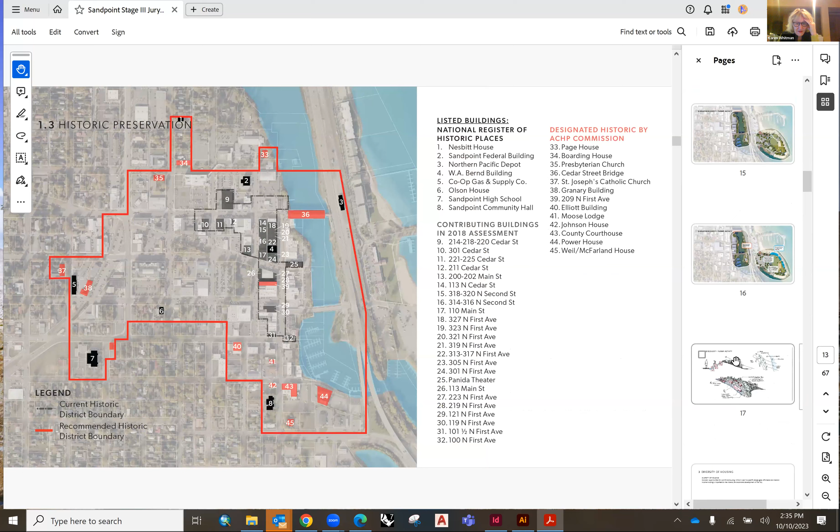In the world of ecology, I wanted to compliment you on the combination of creativity and utility around the Chief Cliff stone seating. I thought that was a very clever and utilitarian thing. The only thing I think will happen is that it'll become so popular that there will be a certain group of people who love it so much that they'll want to be the owners of the space forever. So you're going to have to figure out a management plan.

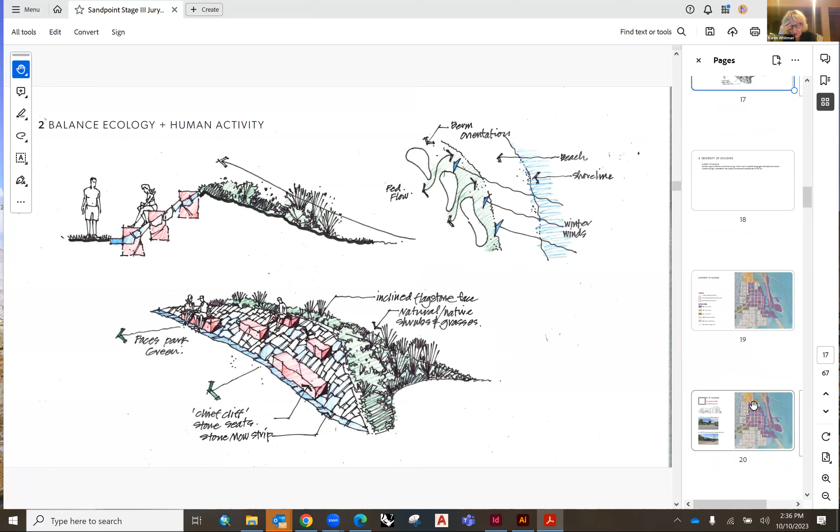I know that the development from the private sector has had a lot of energy, if not urgency, associated with it, and that's been a key consideration. I'm just wondering, in the conversations Don referred to about meeting with developers, if there's an indication that a partnership for workforce housing might not be registered at this early time.

I also think there would seem to be existing data showing the influx of seasonal workers. When do they get here? How long do they stay? What kind of accommodations do they need? Because you've got a very integrated, active, consolidated community there, I would think that 200 number could be verified pretty quickly.

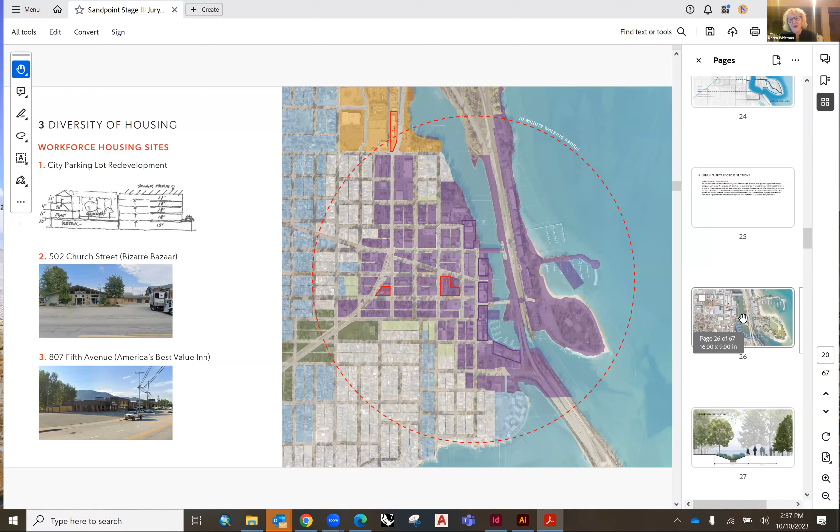Similarly, and complementary to what I see as a very cohesive city and community there, I think I've heard it registered here about the bicycle plan. You've got a new plan, but bicyclists in Sandpoint have opinions on exactly how they want to move around the community. So I'd urge you to look at other inputs they've had, or ask their opinions solidly about this recommendation you're making.

I was an early advocate to add a lighting concept to this overall plan, and I think you hit the nail on the head in three ways. One, I love that you understand lighting can be customizable—that's a big word, but it has so much potential. Two, you recognize it as a storytelling opportunity. Three, the light show you showed in the winter. One thing that hasn't been added, since I've done this work myself, is that it's a pretty low-cost entertainment activity, and I don't know many people who don't thrill at the opportunity to participate in regular and spectacular light shows. So very nice job understanding exactly what you're doing with this lighting framework plan.

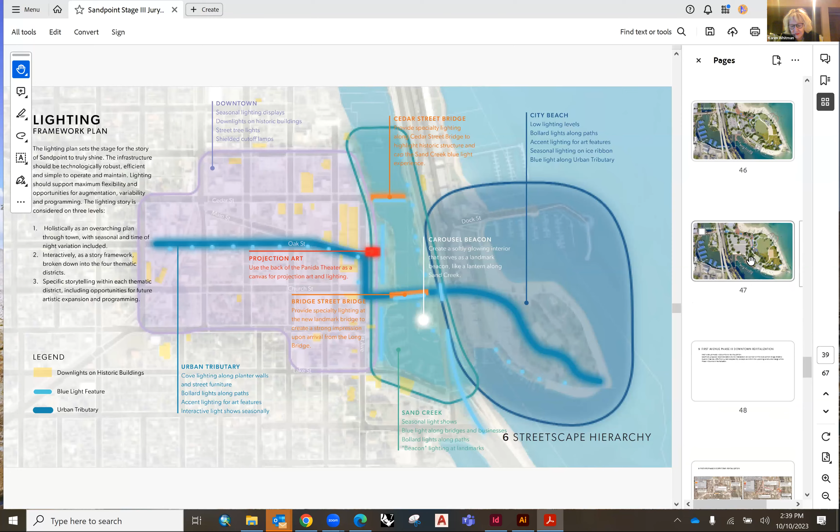The city beach was one of my inputs also, and I think there's been great improvement in reconfiguring the boat and car parking. I do think the general circulation still has a couple of question marks, so I'd conclude that it's not quite finished—that's a direct quote from you—so I don't think I have to urge you to keep looking, I think you'll do that on your own.

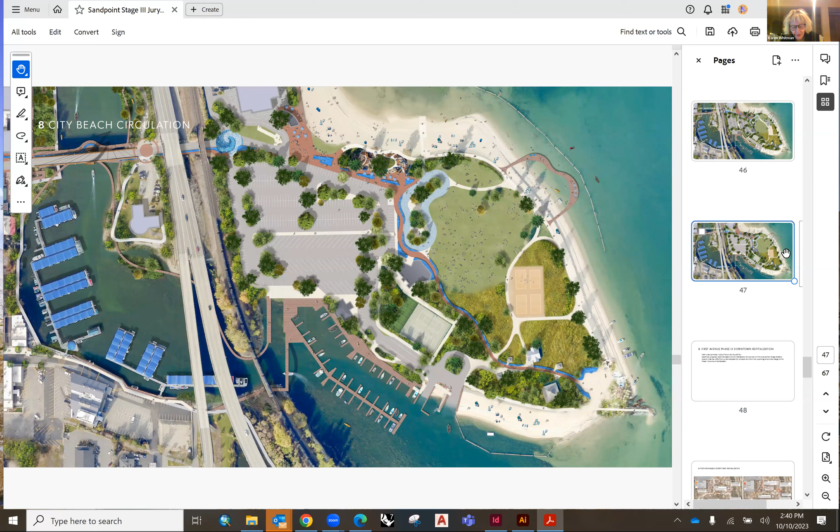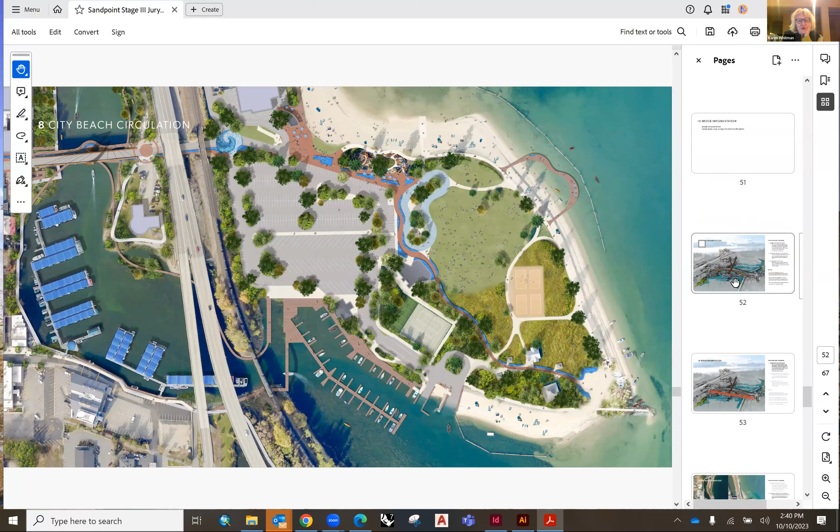The final thing is, what I loved about the bridge concept in the first place was how it tied to everything about Sandpoint that I've come to know, and the fact that you respect your history and like using it to remind people why they live, work, and play there. So further positive thinking is good, further ideas will be thrown at the wall to see if anything sticks. I think this bridge is really also the bridge to the future of Sandpoint. Those are my comments. Thank you, Karen.

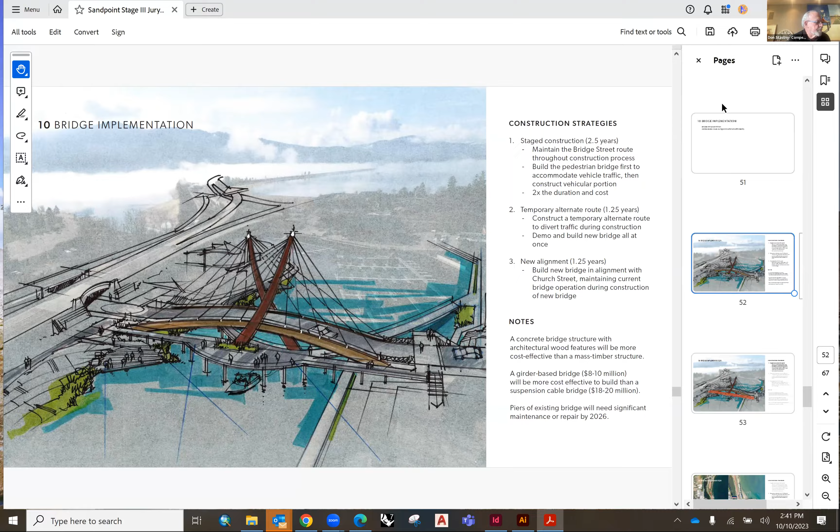For everyone, we've gone beyond, but I think the point at this part of the process is that the jury's comments here are ways for the city to continue to evaluate this plan. I'd go back to what we started with, our design program with specific design goals: create a holistic framework, incorporate nature, protect and enhance the water, acknowledge the tribe's unique relationship with Sandpoint, celebrate Sandpoint's history, enhance year-round recreation, integrate art and increase experiences and attractions, generate economic development opportunities, connect and provide access to attractions, recognize the need for resiliency in design and development, and build on the community's input to address the area as a whole. As our process has evolved we've become more detailed, but this is not a final adopted plan—it's an overall framework by which various projects within Sandpoint can be identified and tied together.